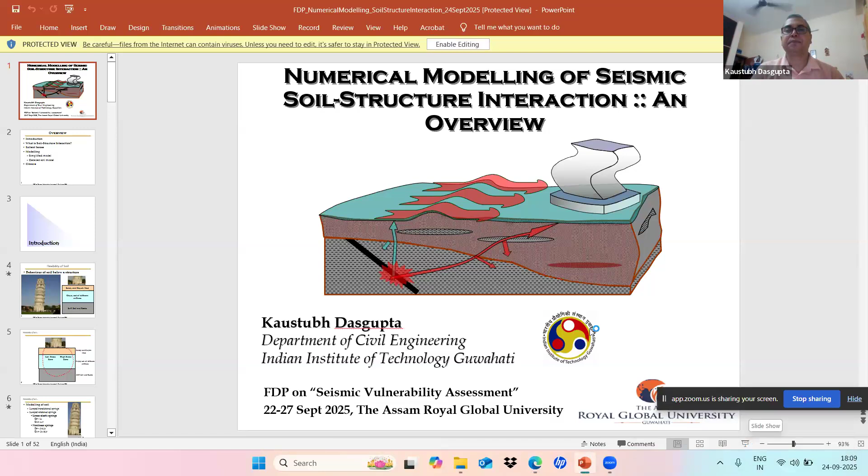The first topic of today's presentation is numerical modeling of seismic soil structure interaction, an overview.

This is a brief overview of my presentation. First, I will introduce the impact of soil on structural behavior and how soil structure interaction differs from our conventional thought of the influence of soil on structural behavior. Then, what exactly is soil structure interaction? We'll have a brief overview, dwell upon the salient issues of concern, and move into the modeling part, primarily focusing on numerical modeling, as is the title of the presentation. We will discuss both the simplified methodology and how the detailed soil model is considered for more realistic analysis, and finally close with a few notes.

For an introduction, let me first give the most popular example of the effect of soil on structural behavior, as illustrated by the Leaning Tower of Pisa.

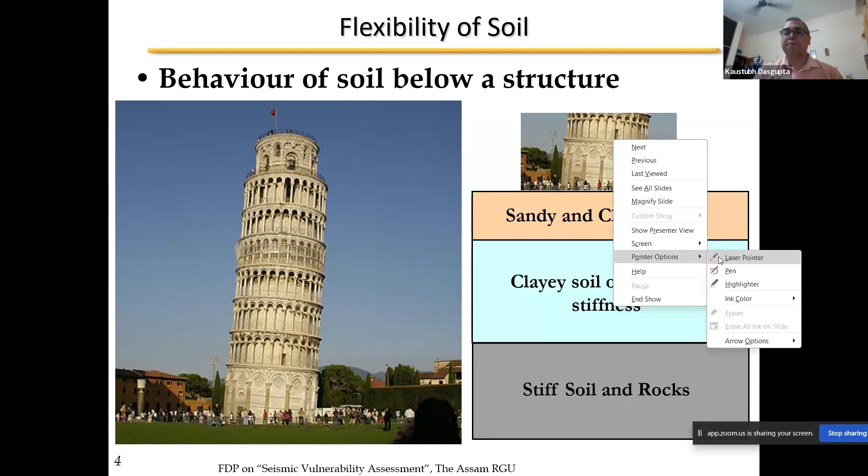What happened was, over a few tens of decades after the tower was constructed, it slowly started leaning. People were concerned and tried different ways of restoring it, like making it stable by means of ropes, or trying to buttress or prop at different locations and heights. But every time, even if it was restored for some time, it started leaning again.

So people left it as it was, and after a certain time the rate of leaning reduced to a very small value, and in some way it got stable. How this stability was achieved, how the underlying soil affected the entire tilting behavior, was a topic of immense research over decades.

If we see the underlying layers below the leaning tower, it was very near the coast when constructed, though the sea line later moved slightly away. Just below the ground surface we have sandy and clayish mud, underlain by clayey soil of different stiffness, and finally stiff soil and rocks.

With this composition of underlying soil, when the initial leaning started, differential stresses were introduced. When a foundation or element tries to bend, one part compresses the soil more, creating more bearing stress or bearing action from the underlying soil, while the other part gets relieved because it's getting uplifted. This composition of underlying soils probably made things easier or facilitated further leaning.

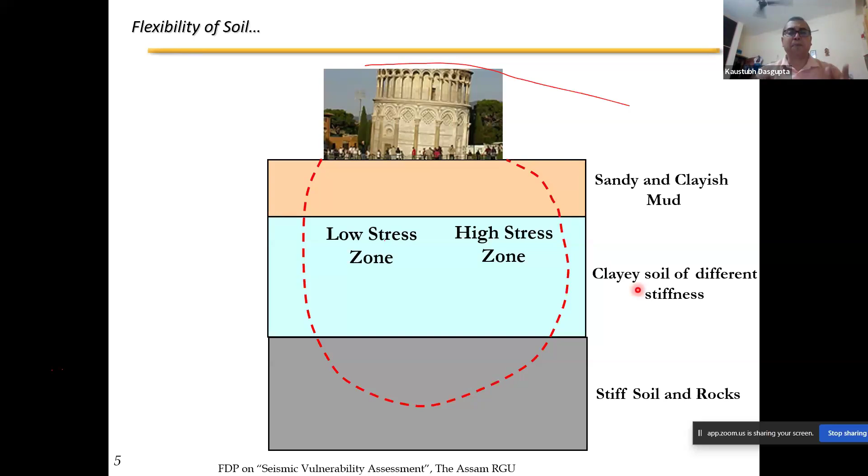When we have high stresses, the microstructure of these soils also undergoes changes. If you go into the depths of soil mechanics and constitutive behavior, you will see that soil can pass through different phases depending on the strain level and stress level. So all of this complicated the entire action.

So people started different ways of trying to understand the behavior of this leaning tower. Whenever we talk about the underlying soil, the simplest way is to consider some kind of spring.

When we say spring, it can be like a conventional translational spring. If you give some displacement between two ends of the spring, it can get elongated or compressed, and depending on the amount of elongation or compression, a corresponding spring resistance develops. That's what we learn in plus-two level physics and undergraduate mechanics.

Apart from translational action, where relative displacement between the two spring ends gives rise to spring resistance, you can also have rotational springs. How does the spring resist rotational action?

The spring is designed so that any relative rotation between the two ends of this rotational spring will generate some resisting moment. Just like in a translational spring, relative displacement gives rise to a force in the form of spring resistance, here it generates moment due to differential rotation. People use these rotational and translational springs in different combinations to simulate the behavior of the underlying soil layer.

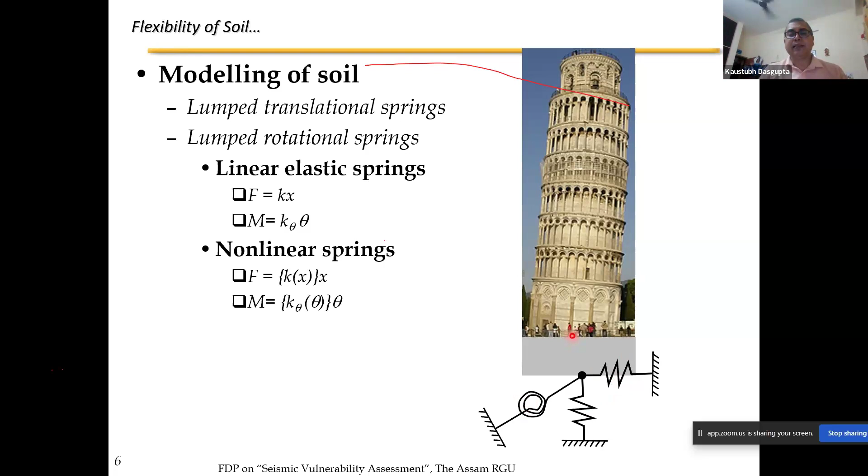Because the foundation is quite large - the diameter of the tower is in tens of meters, not 3-4 or 5 meters - beyond that dimension, this single lumped spring modeling does not give realistic behavior. So people tried distributed springs instead, considering the underlying foundation like a plate action over which the tower is standing, and then tried to simulate it. This is a slightly more advanced way of modeling the soil, using distributed springs instead of a single one.

Then people thought that instead of this spring action, why not model some part of the underlying soil as a domain. In domain modeling, we generally adopt the numerical method known as the finite element method, which has been very popular over the last century. There are different ways of considering the size of the domain, how you decide these elements in the entire domain, and so on. People have done a lot of studies on this.

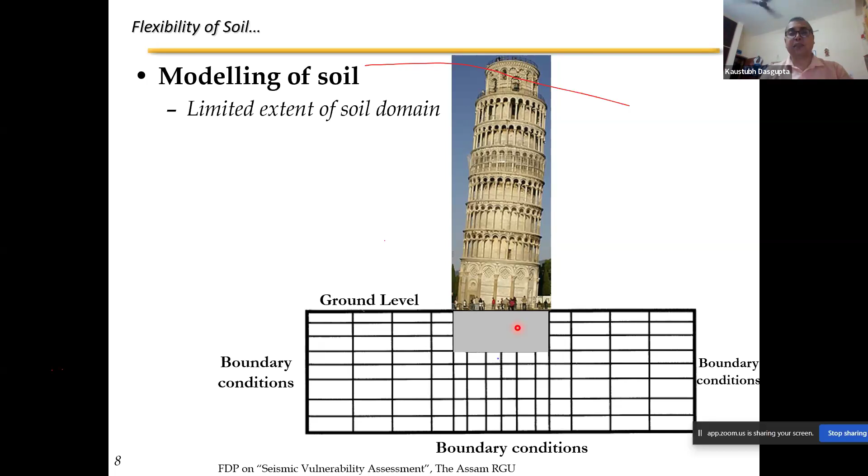Let us look at a small example. That was a practical example. Let us now look at some numbers. When we do structural analysis for any kind of normal building or conventional structure, small structure, we never consider the effect of underlying soil, right? That's not part of the conventional design process, or the analysis part.

So here we apply a lateral load of certain value, and we want to see how the columns and the beam respond through the bending moments, right? Because under any applied load, the members will generate shear force and bending moment.

We all are aware. So we are considering 3 types of soil: one which is very soft, similar to the upper layers of the Leaning Tower of Pisa; then medium stiff; and then very stiff. Very stiff means we are now going close towards rocky behavior, where the deformations and those things are very, very less. So we want to see how the bending moments are generated on this portal frame.

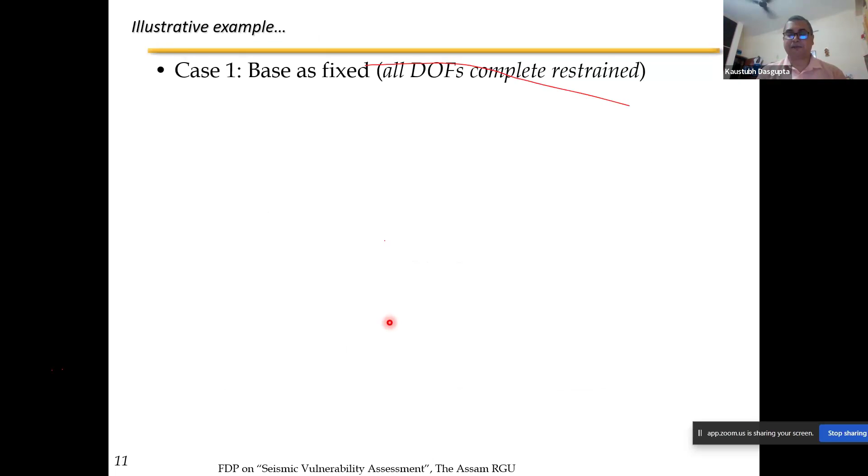So this is how the frame looks like. In the first case, what we are considering is that all the degrees of freedom at the base are restrained. So one is the fixed base. That is the conventional method of analyzing any kind of building frame. When we do not want to consider any effect of soil, we simply consider all the translational and rotational degrees of freedom to be fixed, right? So no rotation, rotations are 0. No translation, translation is 0.

In reality, does your soil really conform to that condition? No, because depending on the stiffness of soil, there can be settlement. Settlement means the translational degree of freedom has to be allowed. Your frame can tilt, just like the Leaning Tower. So there can be some rotation, so your rotational degree of freedom also has to be allowed. So in reality, your degrees of freedom being completely restrained is not going to happen at all.

But then why do people consider that in conventional analysis? Because even if you consider this fixed base, the estimated moments and shear forces we use for design are expected to be on the higher side. So your design is going to be conservative and safe, right? So people are really not bothered about the effect of soil. So that was the first case.

Second case is we assign the translational and rotational springs, just like we saw for the Leaning Tower of Pisa. That is case 2. And case 3, we are going to have the soil model as continuum, so the domain method, we call it a continuum method, like the soil is a continuous medium. We are discretizing in a certain way and then considering that extent of the soil. So we have 100 meters on the horizontal side, that is the size of the domain, and to a depth of 30 meters. And case 4, when you have the soil modeled as continuum with the same properties, but with flexible boundaries. So these are the 4 cases.

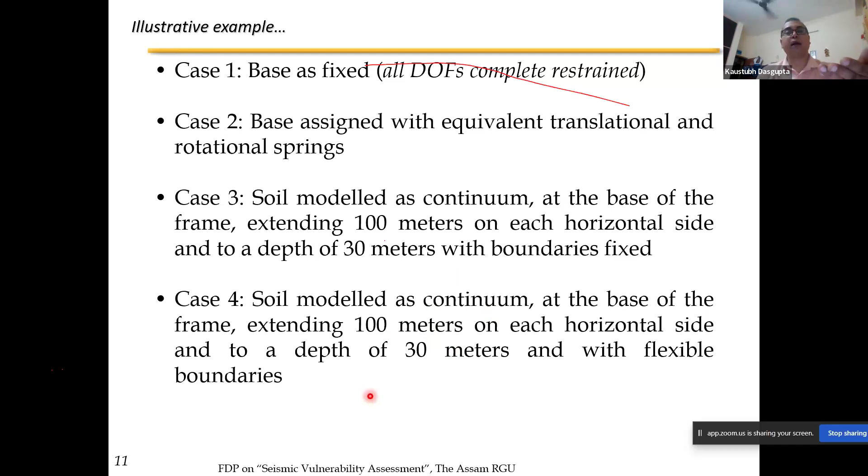Let us see the results. Just on the portal frame, we want to see the effect of soil through the different kinds of modeling. So this is how case 1 will look like: you have fixed bases, right? No degrees of freedom has been released. These are your translational and rotational springs, as we had seen, the vertical, horizontal ones and the rotational ones.

That is case 2. Case 3 is this domain. As you can see, you have your soil domain 100 meters on either side, extending, and 30 meters deep, and then the end nodes have been kept as fixed, right? So that is case 3. On that your portal frame is sitting.

Similarly, when you have case 4, you have these boundary ends. These are with springs, right? So these are not fixed. That was case 4.

So if you see the result, what happens when you have a completely fixed base, that is no effect of soil - you can see how much is the magnitude of bending moment. It is around 714 kilonewton meter at the column base, and at the column top or the beam end, it's around 530. So this is the conventional method, no effect of soil, and this is supposed to be giving you overestimation of forces and moments.

So this is case one. Let us look at case two. In case two, you have very soft soil. One is with continuum soil model with boundaries - this one, when you have the soil domain, that is 2A. And then second one is your 2B, that is when you have equivalent soil springs, right?

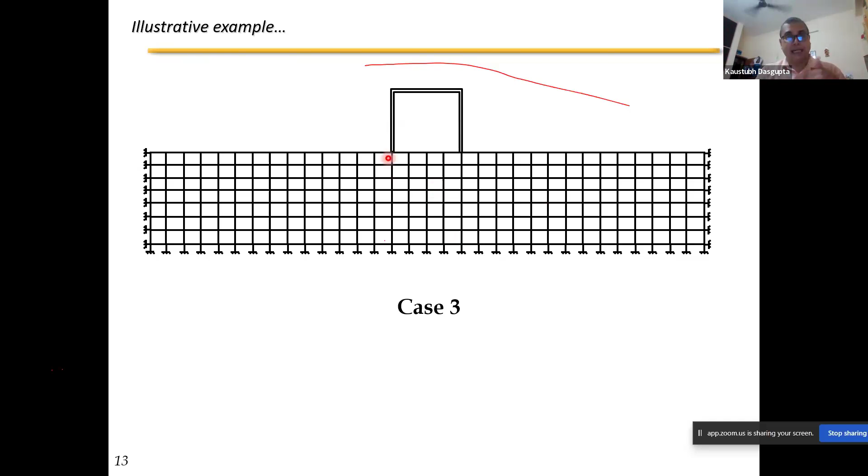So when you are using this domain model, that is 2A, your bending moment has reduced from 714 in the previous case, where you did not have any soil, to 284. There is a significant reduction in the bending moment. What happens at the top? The column moment has reduced, but at the junction, earlier the moment was 530, now it has become 960, almost a twofold increase. So what has happened? The bending moment at the bottom of the column has got released, and more moment has been accumulated at the junction. This was with the soil domain, the one most close to realistic.

And when you have the springs, what happened? The bending moments at the bottom of the column definitely were reduced as compared to the fixed one. From 714 with the spring, it has reduced to 596, around 600. But it has not reduced to the extent when you model using the soil domain. So with the spring, definitely your soil behavior is affecting, but your domain model is coming out to be the best one because that is really giving the relieving effect of the soil at the column bottom. And at the junction, since the reduction at the column bottom is not that much, the beam column junction moment has increased, but not as much as the increase in the domain model case. So this shows how different ways of soil modeling really affect the results.

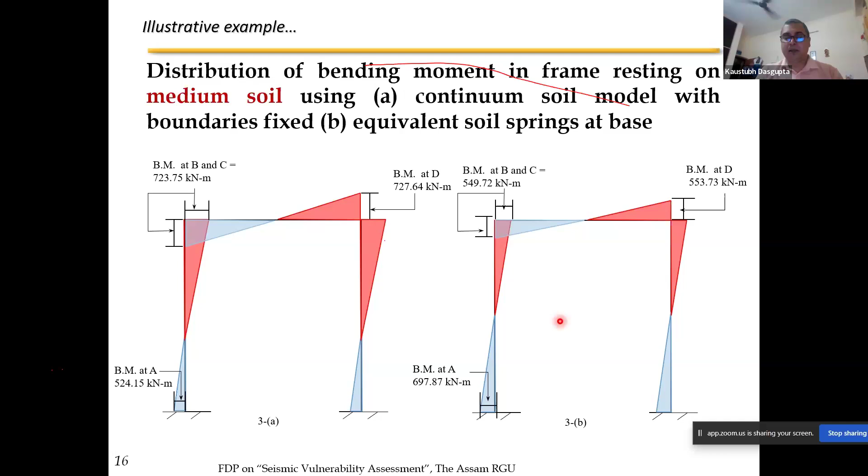And then when you have very stiff soil, it is going closer to the condition of rock. In rock, what will happen? If you have the column embedded in rock, how do you carry out the construction of the foundation? You can provide shallow footing because you have very good bearing capacity. Rocks can offer immense bearing capacity, so you need not go for deep foundation. So in rock, if you have to do some foundation, you go for open foundation, shallow footing, and that too you have to drill the rock, right?

If the rock is very hard, then depending on that rock quality designation, RQD, you have to do the blasting and then find out the area, then do that. Once you have an open foundation in the rock, it does not have the ability to rotate, does not have the ability to translate in any direction. So it is more like all degrees of freedom restrained, close to the fixed base.

So for fixed base, if you recall, your value at the bottom of the column was 714 kilonewton meter as bending moment. And here for the very stiff soil, it is very close. It is less, but very close. So as you can see here, your domain model will still give you less moment as compared to the spring, right? So this is how the modeling of soil is going to affect the structural behavior.

So whatever we discussed till now was the influence of soil on structural behavior, as exemplified by the leaning tower or the frame behavior. So no SSI till now. So then what is SSI? What is all the hue and cry about soil structure interaction?

So if we want to see what soil structure interaction is, we have to briefly first start with how the earthquake mechanism happens. Typically we have some release of energy in the crust of the earth, or in the mantle, depending on the depth. There is a fault rupture somewhere, energy gets released, and the energy gets propagated by means of waves. When you have waves, they have to follow all the mechanics and physics as we studied for waves in our plus 2 level, class 11, class 12. So you have reflection, refraction, total internal reflection, and whatnot. Everything happens. These are called seismic waves. If you read more into that, you have body waves and surface waves, and so on.

So initially, the body waves propagate through the rock, then they reach the soil domain. This brown part is your soil domain, and then they reach the surface. During this entire propagation through the soil domain, the waves keep on changing their characteristics. The amplitude, the frequency, all get changed depending on the layers of soil and their constitutive properties. So waves undergo changes, and the final wave reaching the surface—here also some part gets traveled along the surface, which are called surface waves. Some part gets turned back inside the domain, and they will again propagate and spread out. So a lot of wave phenomena carry on, keep on happening.

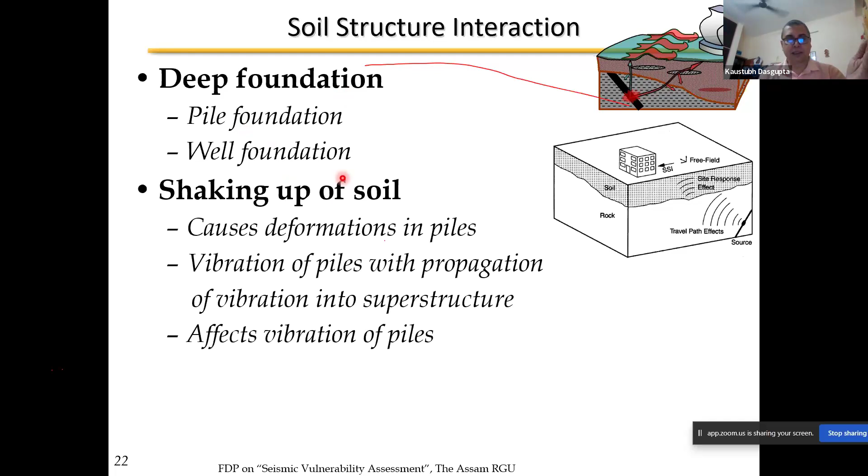As I was mentioning, shaking up of soil causes deformation in piles. Vibration of piles will vibrate the superstructure. Superstructure vibration will affect the pile vibration. Piles are long elements embedded in the soil, and the vibration of the surrounding soil will be further influenced. So this is the repeated interaction which we call soil structure interaction.

Hope it is clear. So when you just model the soil as it is and apply a static load, it is never an SSI. So if you hear somebody calling that SSI, it is not at all correct, please note that.

So this is how your piles will be embedded in the soil domain. And then when you look at the boundary, what happens is, when the waves come and affect the surrounding soil, the soil will vibrate the piles and the entire shaking will propagate upward.

Now what happens, some of the waves also turn back. In all directions, the waves will be turning back. Some of them will get reflected from the pile surface and turn back. When they turn back, your waves will again go and dissipate away into the largest soil extent, so they will not affect the structure.

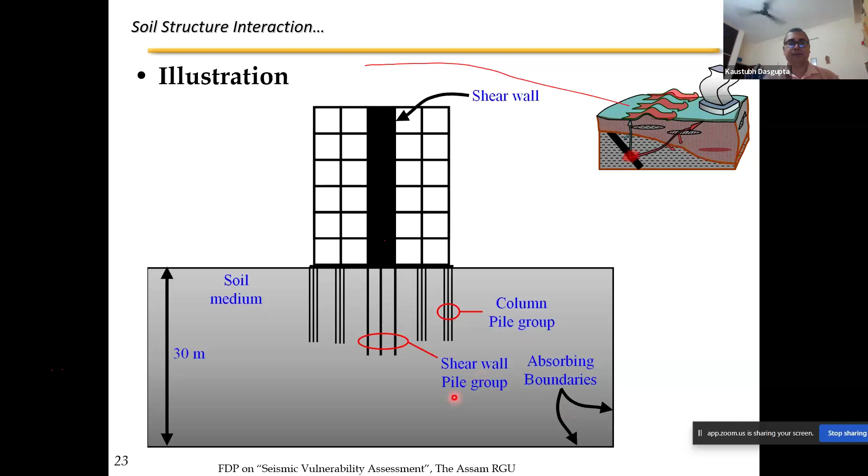So if you model these as fixed boundaries, as we had done for one case for the Leaning Tower of Pisa, it will not give you realistic soil structure interaction, because the waves will get trapped and keep on reflecting. Similarly, when you do SSI, the conventional modeling or restrained footing will not give you your SSI, because when you restrain the degrees of freedom, all your effects of soil are gone. So this is not the way. Then what should we do?

When we do simplified modeling, we consider it as a multi-degree of freedom system, which we convert into an equivalent single degree of freedom system, like an inverted pendulum. This is the conventional way in structural dynamics. When you do dynamic analysis, you sometimes convert it for a simplified method into an equivalent single degree of freedom system. We call it multi-degree of freedom because at different floor levels, masses are lumped, and at each level you can consider some displacement. So multiple degrees of freedom, multiple translations, are required to describe the dynamic behavior, instead of a single degree of freedom with only one translation describing the behavior—that is simplified.

Why is this equivalence really required? Because for a single degree of freedom system, just like the behavior of a simple pendulum from your 11th and 12th physics background, you can easily find the natural period of vibration or natural frequency, and that can be related to earthquake behavior. Whenever you talk about seismic behavior, your natural frequency and natural period are very important. Whenever we do any seismic or dynamic analysis, the first thing we check in the numerical model is how much the natural period and natural frequency are coming, which tells you whether your modeling is correct, based on physical experience of the expected range.

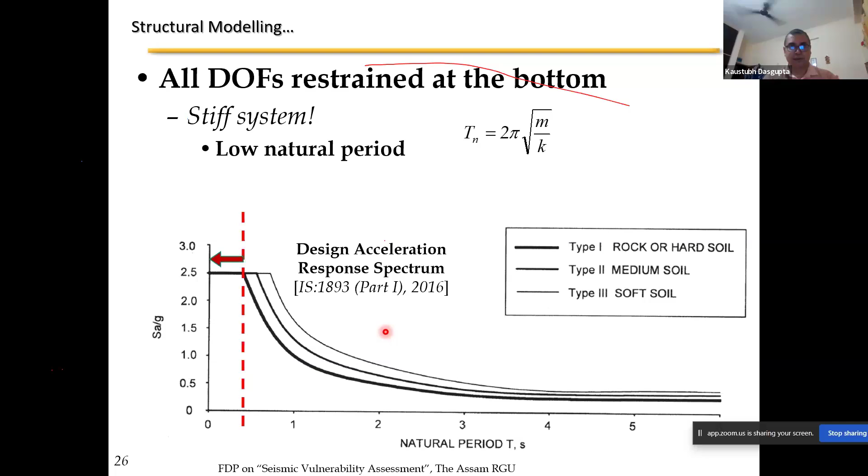This figure is proposed in IS 1893, and it is going to be used for design, not for anything else.

If you really look at the response spectrum, it is never such a smooth, nice looking curve. There are a lot of irregularities, ups and downs. So to simplify things, to make it easier for practical designers, this document has published such a nice figure.

This is used to estimate the equivalent lateral forces, which gives you the design seismic forces: design shear force, design bending moment, in combination with other loads.

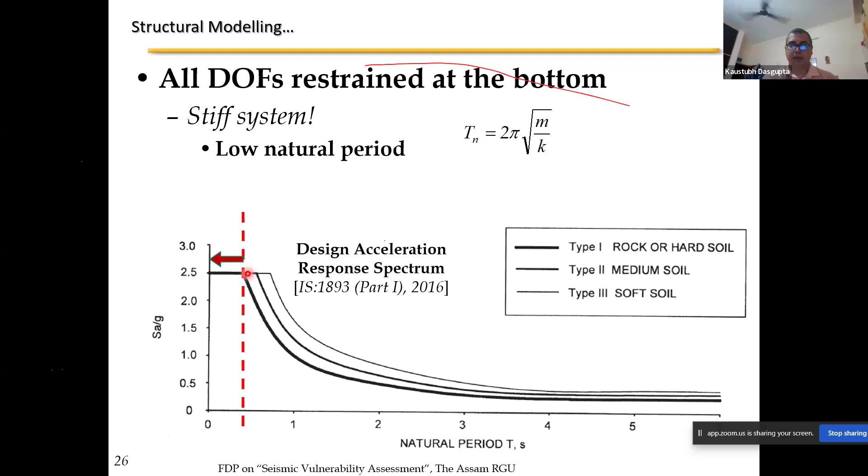When you have a stiff system, like the conventional one with all degrees of freedom restrained, there is no soil. So for a stiff system, with large K, K being the stiffness, your natural period comes down because the denominator is large. So you have low natural period, and then the acceleration is more, giving you a conservative estimate.

When you have presence of soil, the K is now less because you are considering either a spring or the soil domain. So K is less, natural period is more, the system is flexible compared to the fixed base. So there is an increase in natural period.

So on the x-axis you are moving, and that gives you less acceleration, because you are now looking at the part of the curve coming down. In this region, the acceleration is less, so your design forces are less. You get less bending moment in the column, less bending moment in the members close to the soil, as we had seen for our frame. So the response is less.

So when you consider the conventional structure with the base fixed, you are considering higher design forces due to the large acceleration, which gives you a safe design. May not be economical, but safe. On the other hand, if you consider soil, your response is less, so shear force and bending moment are less. Everything comes down.

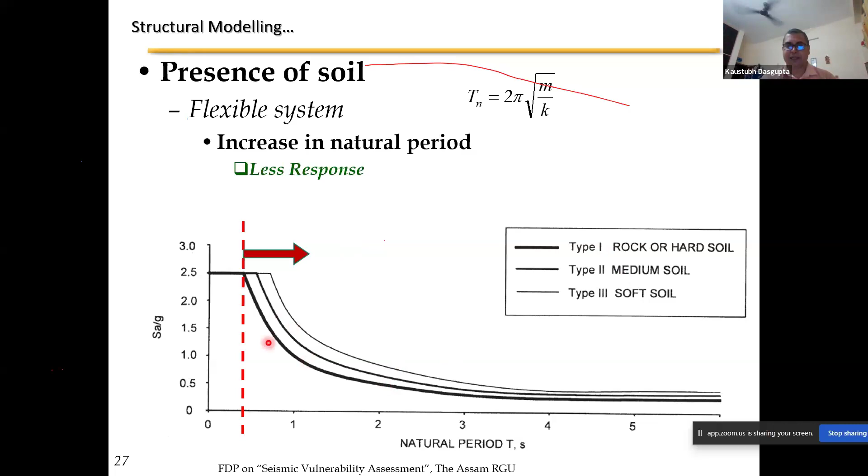Then the Indian code also prescribes three curves for different types of soil. You will have different effects for the same natural period. So if you ignore the effect of soil in the dynamic behavior, you are going to have a safe design. That is what we expect from that response spectrum, and if you consider soil, you expect less response.

Does it happen always? That is the question. Whenever an earthquake comes, is the response spectrum going to behave like that? Does ignoring soil, fixing all degrees of freedom, always give you a safe design? That is the question.

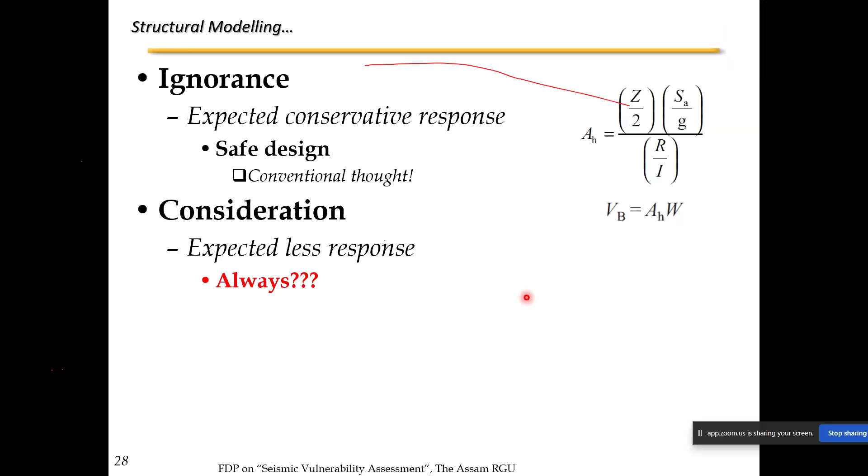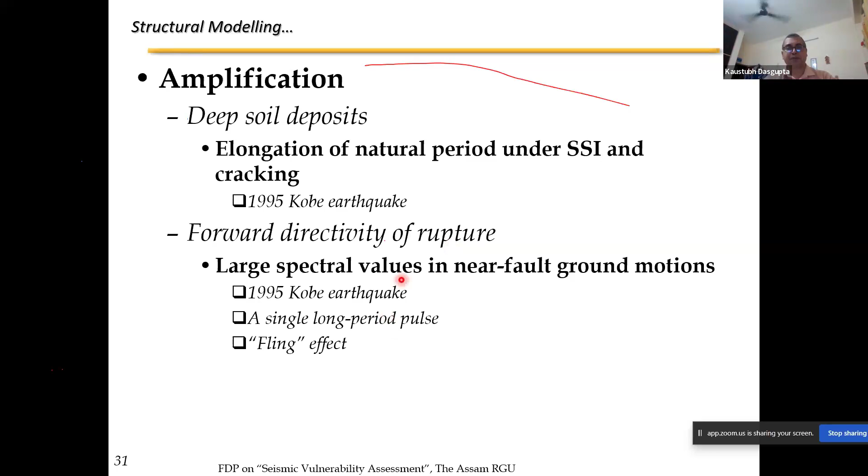There is also a particular terminology in earthquake engineering called the directivity of rupture. When a fault gets ruptured during the release of energy, it ruptures in a particular direction. So if a fault is oriented from southeast to northwest, is it rupturing from northwest to southeast or from southeast to northwest? Along the fault you may have different buildings, so depending on the direction, your amplification can change. There are different effects, like the long period pulse and fling effect for near fault motion. All these can lead to collapses and can amplify soil structure interaction.

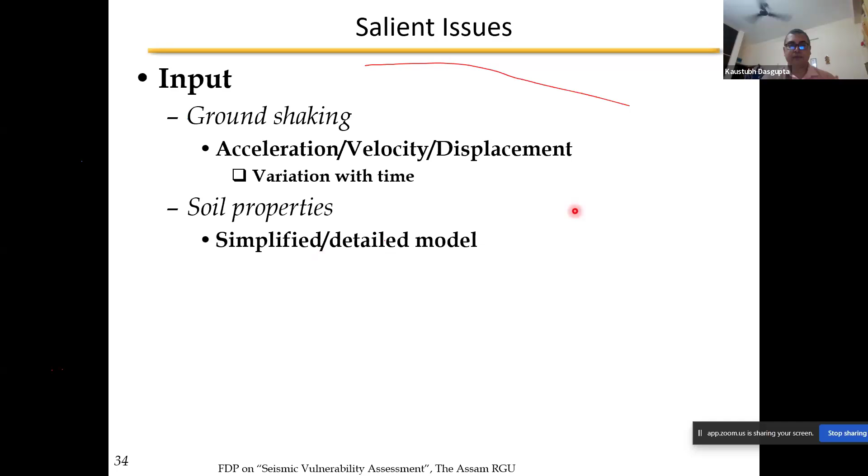Then soil properties - these are very important, whether you are going for a simplified model or detailed model, how you are using constitutive properties. Constitutive properties of soil are very, very important. Why? Because depending on the type of soil, you have different behavior - you can have dilation, you can have phase change. If you talk to a geotechnical person, they can explain phase change to you. So all these affect the behavior.

And especially during earthquake shaking, what is happening? You have, over a small amount of time, large strain in the soil, because when the ground is shaking, there is large shear strain. When the waves propagate from rock to the upper layer, the soil layers try to shear against each other - horizontal movement. So shear strain momentarily increases to a very large value. When the shear strain increases, the damping ratio and the shear modulus all get affected. You have standard curves for the change of shear modulus or damping ratio.

So those are very important: how you model the soil and what are the constitutive properties. Whether you are considering drained condition or undrained condition, because over a momentary time, since the strain increases, the stress goes up, the pore water pressure can go up to a very high extent.

And depending on the type of soil, if it is sandy or sandy silt, or for certain soil, the soil can liquefy. So you can have liquefaction during the soil structure interaction. So all these are very important.

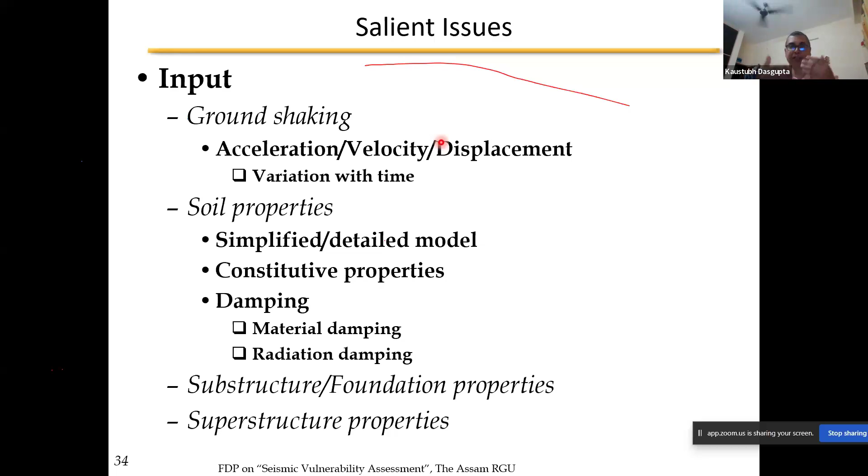Then we talk about near field effect. When you have ground shaking very close to the fault, then you can have the interaction close to the soil foundation interface. You can have far field effect when the fault rupture is at a very far away location, and when the waves come and reach the site, you can have a different kind of far field effect. So different connotations, different effects are there, just to familiarize you with the different terminologies and effects.

Let us now come to the modeling, the numerical modeling part. I won't go into very deep detail, but we will give you a good overview.

So the first one is your lump spring, which we have already discussed. In the lump spring, you have 3 degrees of freedom for translation, and you have the translational springs I had mentioned in the Leaning Tower of Pisa example, for all 3 directions. You also have 3 possible rotations: about the x-axis, about the y-axis, about the z-axis. So about those axes, since you can have rotation, you can also model the rotational springs, which will give you the moments.

So you can have rotation about the vertical axis, that is like a torsion, about the column axis, where the entire foundation or pile cap rotates in the horizontal plane. That is your torsional stiffness, torsional moment. Then you can have rocking - your entire foundation can rock back and forth. So about the x-axis you can have rocking, about the z-axis you can have rocking.

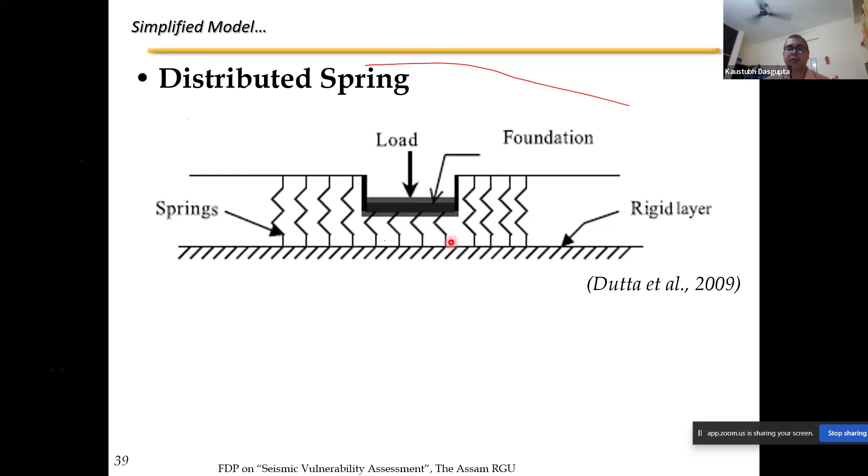Now what about the rotational behavior? When this foundation tries to rotate, it will get tilted. So some springs will be under tension for the uplifting part, some springs will be under compression for the bearing part. So there will be the effect of rotation coming onto this translation spring. A single spring will not be able to capture this rotational effect, but when you have multiple springs, you can capture it to some extent. So this is the distributed spring model - one step better approximation of the underlying soil behavior, though not fully.

When you have distributed spring, it's typically used below raft foundation or mat foundation, whether you have raft with piles or without piles - below the raft we consider distributed springs. Nowadays we have different commercial program softwares trying to model the slab as a plate element, and then you can have these springs.

How do you get the spring constant? By considering the modulus of subgrade reaction. Depending on the type of soil, certain values of K are specified, and that's how you do it. So for design level, quick approximation, maybe on the conservative side, this spring model as a distributed one is quite good - that's why people use it in design. That means it must not result in unsafe or unconservative values. So this is the second way.

The third option is, if you do not have only translational linear elastic springs, you can have elastoplastic springs. So you can have one elastic spring and another plastic element, combined together.

How does it work? Whenever there is settlement, deformation, or tilting, the raft will tilt. Up to a certain level of displacement, the linear elastic behavior is captured by the elastic part. Once it crosses that yield limit, the plastic element takes care of the inelastic behavior. So for large displacement, up to the linear elastic part this is active, and beyond that the plastic element becomes active. This is one level of approximation to take care of the nonlinear behavior of soil.

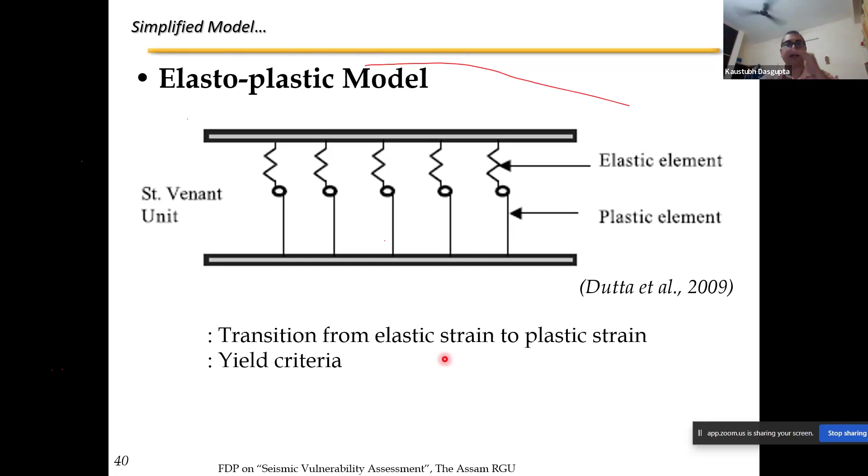As I was mentioning, beyond a certain strain, most soils show nonlinear behavior. They don't show linear elastic behavior, where if you reverse the strain along the same path, the stress values would also be reflected. It doesn't happen like that. So certain yield criteria need to be specified for the transition, where yielding will happen, and so on.

Then the most common one, which is used not for design—when you do soil structure interaction, rarely is it used for design. Most of the time it is used for evaluation. So you design the structure, you design the foundation, then you want to see under an actual earthquake how your foundation will behave, how your surrounding soil will behave. That's when SSI comes in very handy. Most of the cases, that's when SSI is used.

So the most common one is the nonlinear Winkler springs. You consider nonlinear Winkler springs specifically on deep foundations, like piles. Piles are considered like beam column elements, and then you have certain nonlinear springs and dampers.

But then when you have ground motion, because waves are coming and vibrating the surrounding soil around the pile, how is your soil going to damp the vibration? Whenever you talk about dynamics of any system, damping is a very important term, a very important property. So damping has to be estimated very carefully and as accurately as possible. In order to specify the damping, we use certain elements known as dampers. There have been studies on how the damping has been modeled, and how it is going to be modeled.

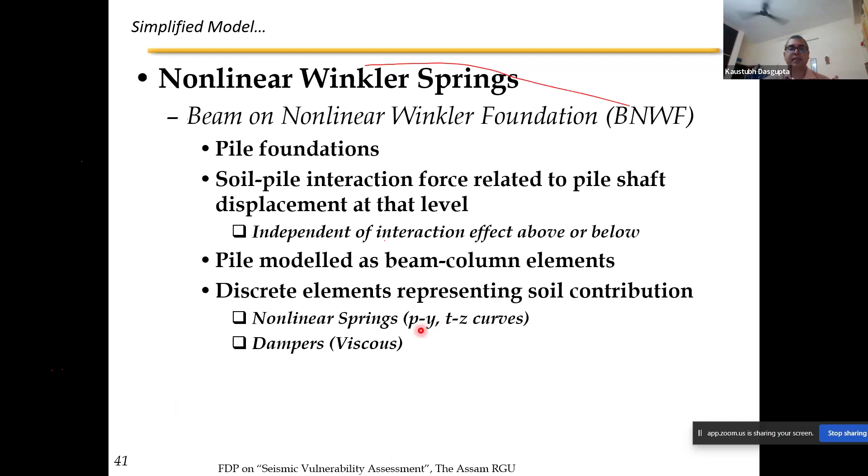So this is how you have the BNWF model. It takes care of near field effect and far field effect. If you do not have the structure, you have the free field soil effect. Based on the free field soil, you can find out how the ground motions are generated at different levels as waves propagate, which you need to give as input. When you consider the vibration, you will have large vibration in the vicinity of the pile, leading to more damping, which is taken care of by the near field element. When the waves dissipate out, you have radiation damping, taken care of by the far field element. So the BNWF model is very, very realistic—it tries to capture all this.

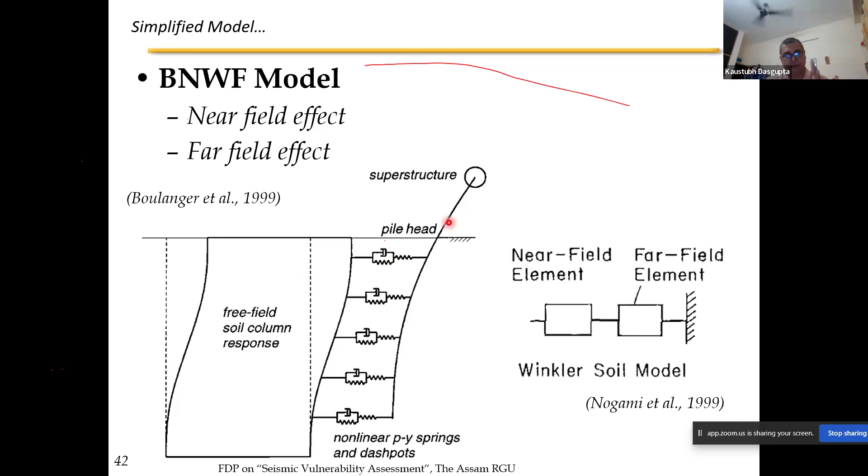So now when you come to the detailed model, these all use certain kinds of springs.

Among the spring models, BNWF is the most efficient one. Then when you come to the continuum approach, when we model the soil domain, what do we consider? It is semi-infinite, linear, elastic, homogeneous - that is the simplest assumption. In reality, the soil is not going to be elastic, and you don't have homogeneity - you can have different soil layers. So this is the most simplified assumption in the continuum approach, and then you build upon that the different variations. So what you have to consider is the vertical extent of your soil domain, because below that is the rock layer.

So you have to model wherever you are modeling the soil. Suppose you are modeling the soil below the building, you have to consider the depth appropriately. You need to figure out how deep your soil layer is going to be in the numerical model, in your finite element model. Do you want to model it right up to the rock layer, or not, because this soil layer is very, very deep? The more you model the soil, the more difficult it becomes in your computation, because your program has to run in the finite element analysis and churn out so much data. So it becomes very, very difficult.

How much will be the extent in the horizontal direction? That also needs to be established - the horizontal extent. And that you can obtain from the free vibration of the soil. There are different methods. This continuum method is the most realistic. Among the three different spring methods, BNWF is the closest to reality, but here you are looking at the most realistic one. So when you do the free vibration analysis, this is how you try to obtain the natural period of the soil depending on the shear wave velocity.

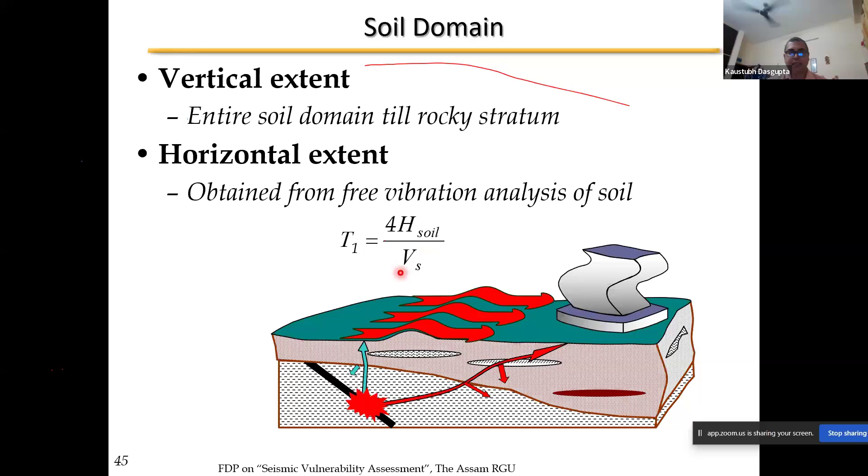When you try to model the soil domain, what will be the size of this element? That also needs to be specified. If you go for a very small element, you can do that, but then the number of elements in your soil domain will be very high, so your computer will take more time. You need a very high speed computer to run your model, which will be quite difficult. You need to figure this out, because we all are engineers - we cannot be like theoreticians, running computer programs for days and weeks and finally landing up with no useful result. That is not our purpose. We should all look at it from the engineering point of view - in a certain limited amount of time, how efficiently we can run the system.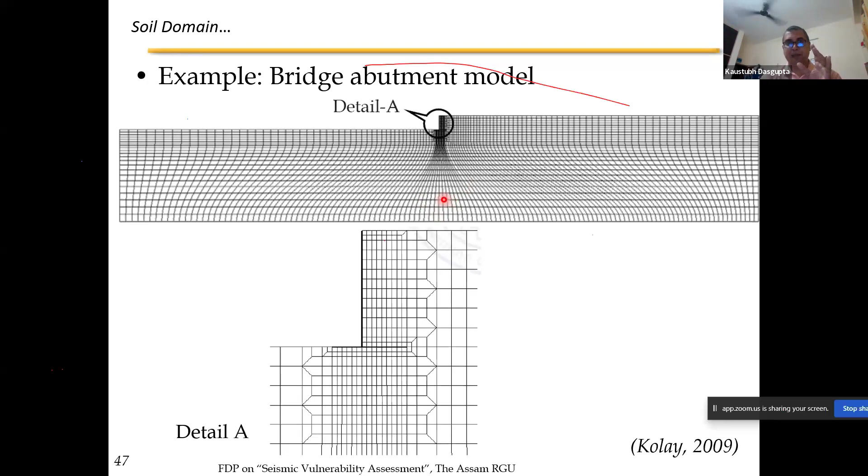If you are going to do soil structure interaction, particularly for research, you should try to see whether this continuum model can be established. If you do this continuum modeling, it gives you the most realistic result. Whatever is the actual condition, exactly 100%, it can never be simulated. You should not think your model is the best — there will always be some limitation, however sophisticated it is. But how far you can do the sophistication within a limited time frame, how close your result can be to realistic, that is the challenge.

Let me summarize. I tried to give you an overview of the numerical modeling part. If you look at soil flexibility, you have relief in the bending moment at the bottom of the column. However, at the beam-column junction, your bending moment increases. But you need to remember that is not the soil structure interaction itself — that is only the effect of soil on structural behavior. So that is one part.

However, when you have soil flexibility, another part is the increase of displacement. Sometimes if you model the soil with a spring or soil domain, the overall structure becomes flexible. Once it becomes flexible during earthquake shaking, your superstructure will vibrate, whether it's a bridge, building, or tower. So you have lateral displacement concerns — you cannot sway the structure too much. If you have a 30-story building and consider sway at the top, people won't be able to stay there. So serviceability criteria becomes an issue, and you need a trade-off for how flexible your building can be.

Your time of computation and associated cost have to always be considered when you do soil structure interaction study. For conventional buildings — small buildings, a 3-story or 1-story house — it may not be affordable, because if you have to do soil structure interaction for that, you need to be paid by the client. The homeowner, an individual house owner, may not be able to afford that much money. So for low cost, low budget projects, this may not be feasible.

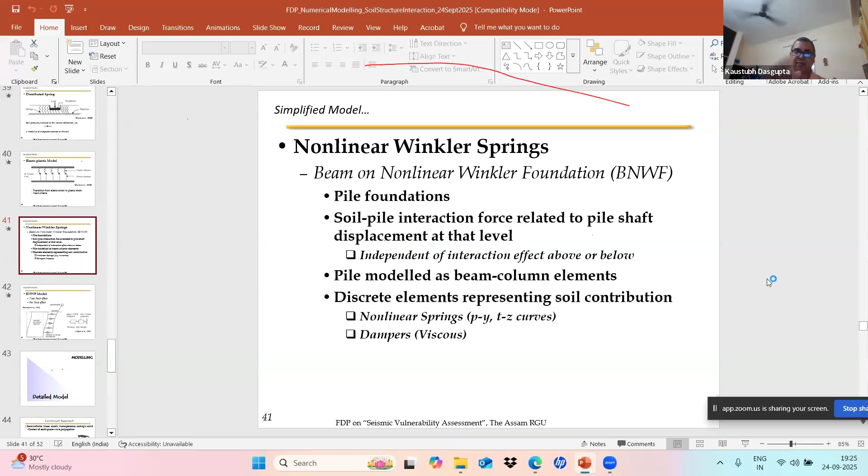What I'll suggest is, if you want to go for a spring model, when you are learning soil-structure interaction, you can go for the BNWF model first. In the BNWF model, if your building is on piles, this is the most suitable one. The building can be low-rise or high-rise, because here you have only the piles and the soil modeled as springs at certain depths. In terms of complexity, this is the simplest. So using BNWF, you can use your full high-rise building, maybe 25, 40, or 30 stories, whatever it be.

However, if you are going for the continuum model, here I should suggest you make a small model, maybe of the building, 5, 6, or 4 stories, and first learn it. You need to give the motion at the bottom of the domain, so that the soil elements get shaken up, the waves propagate through the vibration of these elements, and wherever the piles are, they get shaken up like that. So whenever going for the continuum model, my suggestion is go for a 4-5 story small-rise building first and learn it. Once confident, increase it, then just replicate the stories keeping the model same. If you wish to keep the model same, no issue, but first do the learning part with a low-rise building.

Okay, yeah. Sir, one more thing - you mentioned the name of a book. Can you drop it in the chat box? Yes, I'll write it in the chat box. Okay, thank you sir.

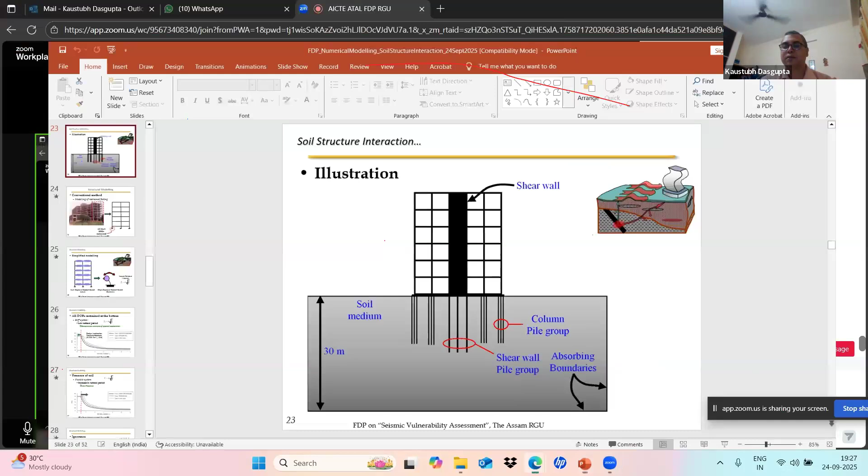It is Geotechnical Earthquake Engineering by Steven Kramer. The first edition came out quite early, I think published by Prentice Hall. One edition came out either last year or the year before, that's the latest edition. This is a very good book, Geotechnical Earthquake Engineering.

Yes sir. I think I have another question from Pravin Thorat: when we are going to design a structure where the strata is partially sandy and partially black cotton soil, what parameters would be taken into consideration while designing?

Very good question, because whenever you have a mixture of sandy and black cotton soil, and even only black cotton soil, it becomes very difficult. My suggestion is first you need to carry out geotechnical tests for the soil layers extensively, like the extent of sandy soil and black cotton soil, up to which depth it is there. You need a number of boreholes and whatever requirements are there.

Once you assess that, what kind of foundation you have to go for, that has to be consulted with a good geotechnical engineering person. The structural engineer as well as the geotechnical engineer should sit together and decide. If you have a high rise building and a lot of load is coming, piles may come out to be very uneconomical, and you need a pile raft over a large extent, because you have black cotton soil settlement and so many things, there can be a lot of changes in the soil. We structural engineers are not at all expert in that. You need a very competent geotechnical person, somebody with extensive experience, so you need to consult them.

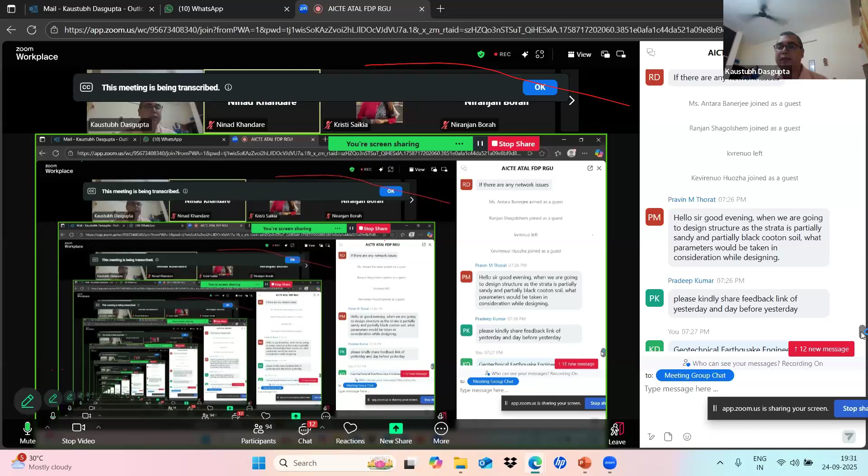Then I think we have a question: can you tell about the future scope for carrying out research in this domain? There is unlimited scope, what I can see. There are so many structures nowadays coming up in soil, in rock, in partial soil. There's so much research to be done.

You talk about tunnels - tunnels are being built everywhere, whether below seabed, below river, through rocks in hills, or through normal soil. So tunnels will have different soil structure interaction behavior for different cases, so there is immense scope. You talk about any buried structure, because nowadays in defense, many army establishments are going for these buried structures of different kinds. So a lot of scope of research is there.

If you are talking about conventional ones, say buildings and bridges, many things we are yet to learn - pile soil interaction for different kinds of soil. There are so many things. In marine areas, when you have piles on which jetties are built, you have the wave action and soil action together, coupled action. There are so many challenges, you can just think and decide.

But when you are going to do research, you should have some area in your mind - you need to study the literature to see what work has been done in one particular area. You have to choose some area of your passion, some interest, and study whatever work has been done, and build upon that. Based on that, you decide your scope of research. There is unlimited scope, a lot of things to be done. A lot of things have been done also, but yet to be done - so many things I can think of.

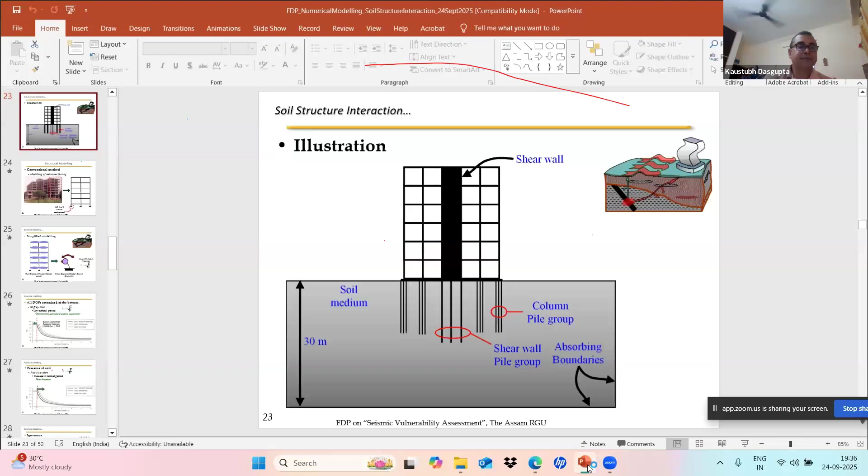How are the ground motions obtained? They are obtained through this free field response. We first do not consider any structure or foundation, just model a soil column, and then we shake up the soil column by means of the rock level or underlying ground motion. Once the soil column gets shaken up at different levels, the property of soil will modify the underlying ground motion.

Whatever has been the input, at different levels, depending on the soil property, through that convolution mechanism, you get the ground motions at different levels. Those ground motions will have different frequency content, maybe different amplitude content, depending on the soil strata.

So basically your question was at which location the ground motions are applied. They are applied at those spring-dashpot locations. Where you want to apply these springs, at which depths, that depends on you. Basically, the way we discretize the pile into a number of elements, at each node we connect the spring-damper system. So at those levels, once you decide where the pile nodes are to be located, and you know the depth, you extract the ground motion output at that depth from the free field response of your soil column.

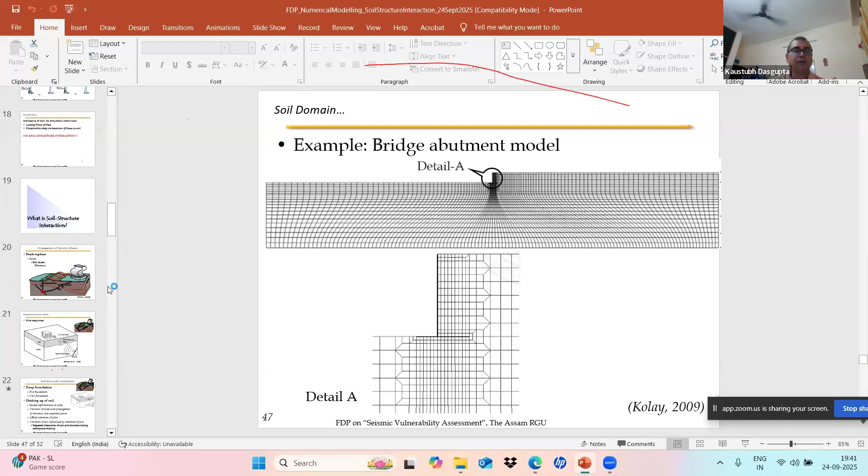Bonisha has asked, what are the available codes for analyzing structure with SSI? Well, if you look at the Indian standard IS 1893, your design response spectrum has curves for three types of soil, as I mentioned. So you can have in the design procedure the codal provision incorporated, having the effect of soil or SSI through these curves. That is the most simplified way.

Otherwise, for conventional buildings, we do not have codes or codal provisions for specifying SSI, because when you go for SSI you need ground motions, and what ground motions you have to apply - that is the challenge. Because when we design any structure, we never apply ground motion, since it's debatable which ground motion you should design for - whether that ground motion will occur at all, or whether that can be the maximum effect, you never know. So for real SSI you need ground motion, and with ground motion it's difficult to design. So directly, the codes do not specify SSI.

But if you look at design guidelines for critical structures, such as nuclear power plants or dams, they specify that SSI is mandatory, and there you have to carry out seismic hazard analysis to a certain detail to get the ground motions. There, the design is done by equivalent static method, then you have to do the seismic evaluation multiple times depending on the possible ground motion. If the ground motions give quite large shear force and bending moment compared to the design values, you may have to magnify or scale up the design moments and shear force. So there are different aspects involved. For critical structures or lifeline structures, certain design guidelines exist about SSI.

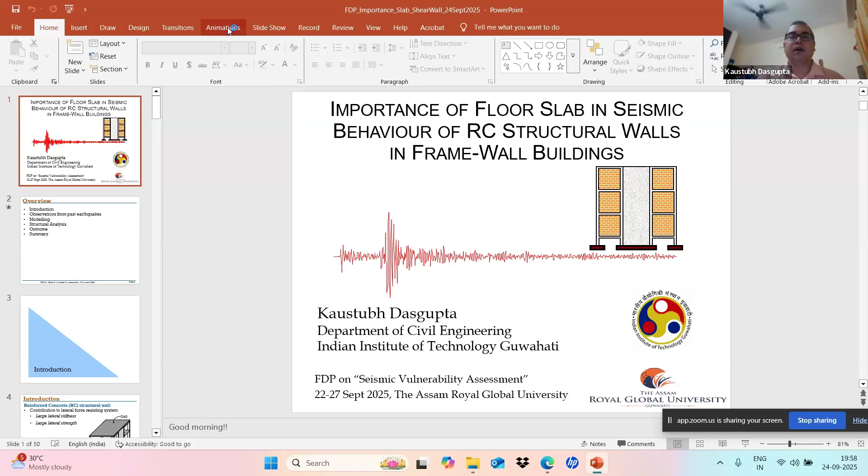So welcome once again. This is the second topic: the importance of floor slab in seismic behavior of RC structural wall in frame wall buildings.

This is the overview of my presentation. I'll spend some time introducing the topic, then we will look at observations from past earthquakes, then how the modeling is done, and then how the structural analysis is carried out in this case. Then what are the salient outcomes? Not all results will be shown, and then we'll summarize.

So with the introduction, let me start with the behavior and the role of shear walls. As we know, in the typical multi-story building we see around in urban areas, we have the frame structure consisting of columns coming up right from the foundation, and then beams completing the framing action. Then you have the floor slabs at different levels, and the roof slab. Once the frame is in position, we have the infill walls, maybe from burnt clay bricks or nowadays autoclave aerated concrete blocks, the AAC block walls. So these can be different ways.

Now what happens when we have this building coming up in an earthquake prone region? The waves will come up, shake up the foundation, and the vibration will propagate first through columns, then the beams, floor slabs - they will all be shaken up and interacting, as we discussed previously.

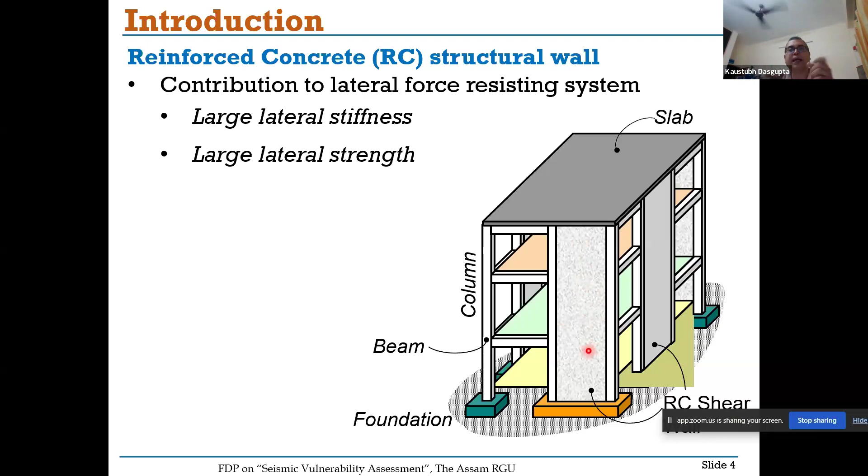So in the out-of-plane direction, in the other direction, this wall will not be effective in absorbing shear force. The stiffness is very small, I is small. So in the other direction, you need separate walls having the in-plane configuration in that direction. If shaking is in this direction, this wall will be effective; if force is in this direction, this other wall will be effective. So you have to position the walls accordingly. This is the transfer mechanism.

Now let us come to the classification of walls. The first one is the slender wall, where the height of the wall divided by the length of wall is more than 2. How will it behave? It is like a cantilever beam turned upward.

In a cantilever beam, you have the horizontal beam, one restrained end and the other free end. If you turn it anti-clockwise 90 degrees, this is your fixed end and this is the free end. Since this is a long member, it will act like a vertical bending beam, simply bending like a cantilever. Since the length is more, it will bend, so flexural strength will govern. The action will be like a beam bending, just a cantilever beam bending in the vertical plane. That is called a slender wall.

This is one figure of a slender wall, taken at University of California, San Diego, where they have a large outdoor shake table. A shake table is a table on which you can mount any model of a structure or component and shake it, giving it ground motion like what you experience during an earthquake. That element is subjected to earthquake motion, and then they study the damages and behavior. This is one slender wall constructed, and as you can see, the height is very tall as compared to the length.

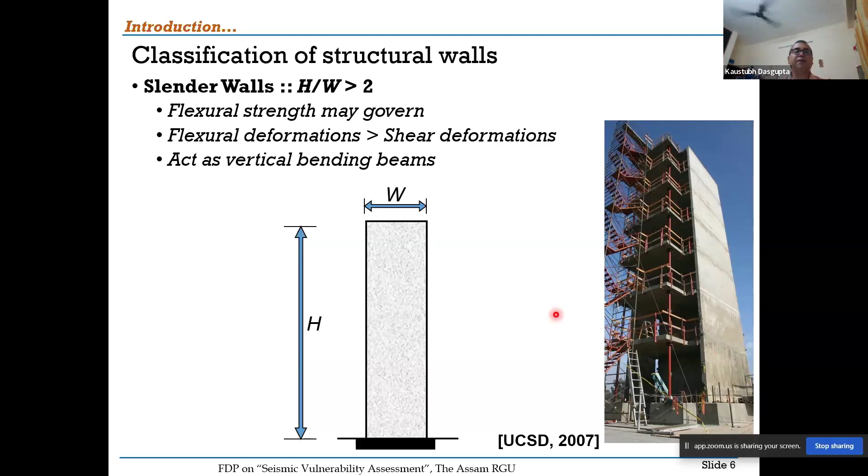Then you have the other category where H by W is less than 1. That is called a squat wall. In a squat wall, if you have any lateral horizontal force, since the height is small, it will not bend. How will it deform? It will deform as if it is being sheared.

So it will deform like a shear action. If you again turn it clockwise by 90 degrees, you get a cantilever beam which is very deep. When you have a deep cantilever beam and apply the load at the tip, does it bend? It doesn't—it simply shears, having a shear deformation. Similarly, a squat wall will also have shear deformation, with very little flexural deformation. So they act as vertical shear beams, and here shear strength becomes the criteria.

Now what happens for the range of H by W between less than 1 and more than 2? That we call intermediate walls—look at the IS 13920 specification for intermediate walls. Here you have a mixed effect, flexure and shear together, so it's difficult to figure out the behavior. These two extreme ends are easier.

For example, you have a lot of such squat walls used as bridge piers. This was taken from a bridge in the region of Sikkim. As you can see, the height is small and the length is large. So although we don't call them walls, they are squat piers.

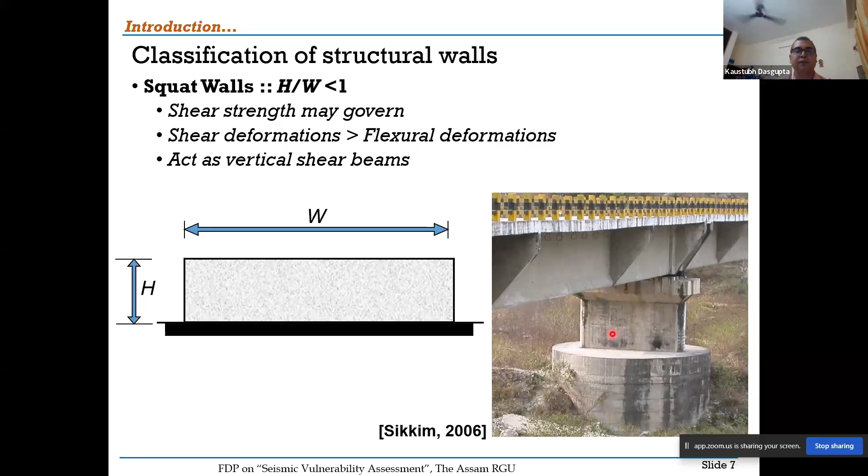The same squat wall is used, but these are squat piers. When you have the shaking, you have horizontal force and they act in that form. Let us see a few failures of these structural walls from past earthquakes.

If you have a weak layer during construction, during earthquake shaking you can have cracks develop that lead to horizontal cracks at the construction joint. So there can be a possibility of small sliding, as you can see here. This happened in the Chile earthquake in 1985.

Sometimes if the underlying soil layer is a bit weak, you can have this kind of rocking action. Initially there may be cracks, but then the foundation or footing will get tilted, and during back and forth action this foundation keeps on rotating. That is called rocking. We talked about rocking stiffness during the lumped spring model in the previous presentation.

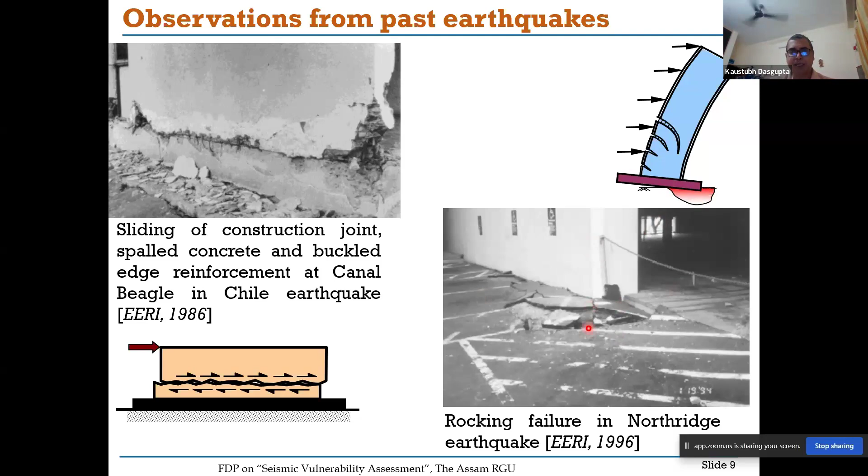So this is one rocking failure. Above the ground you may hardly see any damage, but you will see the damage below, because the damage is primarily here. There was some paved area, and the paving also got damaged because the underlying soil underwent some changes.

In buckling, what happens? You apply compression, and if the member is slender it suddenly deforms laterally. First it undergoes axial compression, then suddenly it deforms - that is buckling. This is not exactly buckling, but since it was under compression and had less thickness, and since cracks were already formed, a similar kind of instability developed in the out of plane direction.

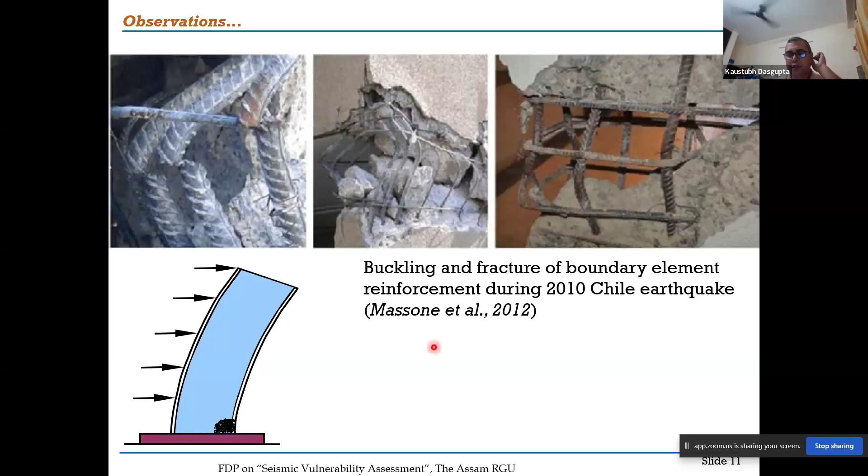There's nothing left to hold or restrain the bars back - earlier there was cover concrete and core concrete surrounding it, but now with large compression the bars can buckle. Sometimes if the bar quality is poor, they can fracture, which is quite unusual - here it has fractured. Then of course you have bar buckling as well as shear failure, you can see the shear cracks like that. These are very interesting failures.

When you have shear walls around the lift or elevator, you can have diagonal cracks. This was observed in a number of buildings during the 2001 Bhuj earthquake. In the bottom part you have the shear effect - even if the wall is slender, the bottom part will have the boundary region effect, known as the D region, disturbed region, and there you can have shear cracks.

In shear cracking, what happens? Whenever you have shear, you have diagonal tension and diagonal compression. The concrete will first crack, forming diagonal shear cracks, then it can get crushed when the loading gets reversed, and so on.

Now here is very interesting - here you have the wall, and here you had the slab. Generally, when we talk about earthquake resistant design, we don't talk about earthquake resistant design of slabs, because beams and columns are the elements supposed to undergo damage during seismic action. So we talk about ductile detailing and earthquake resistant design for those elements; slabs are generally kept aside, they're not supposed to get damaged. Here, the entire slab wall junction got damaged.

During earthquake shaking, maybe the damage started in the wall, but then it propagated into the slab. That was the interesting part - it gave deep insight that even slabs may not remain undamaged. Since this happened, many times we ignore slab damage.

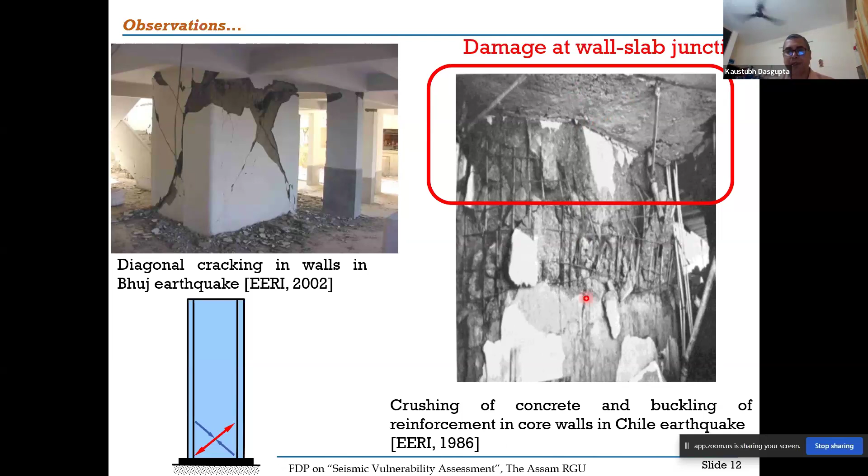This was also observed in the 1985 Chile earthquake, which was an eye opener. The damage at wall-slab junction, since it was observed in 1985, became an interesting topic. In different failures of shear walls, these two Chile earthquakes carry a lot of significance.

Chile is a country with quite improved provisions for design of shear walls. Since Chile is an earthquake-prone country on the Pacific coast, on the lower side of South America, earthquakes keep on coming, small and large magnitude.

These two earthquakes were of particular significance because many high-rise buildings which had shear walls designed as per established provisions, with perfect ductile detailing, many of them underwent different kinds of failure.

Just like the Kobe earthquake brought a lot of change in the design of viaducts, flyovers, and bridges as per Japanese codes, these two earthquakes made Chile earthquake engineers think and formulate new provisions for shear walls in buildings. So that's why these two earthquakes are very important.

In the 1985 earthquake, there were other observations also at slab-wall connections. The concern is that stresses developed at the wall-slab junction led to that damage, so the presence of slab is perhaps influencing the performance of the wall. When we talk about slender wall or squat wall, there was no slab.

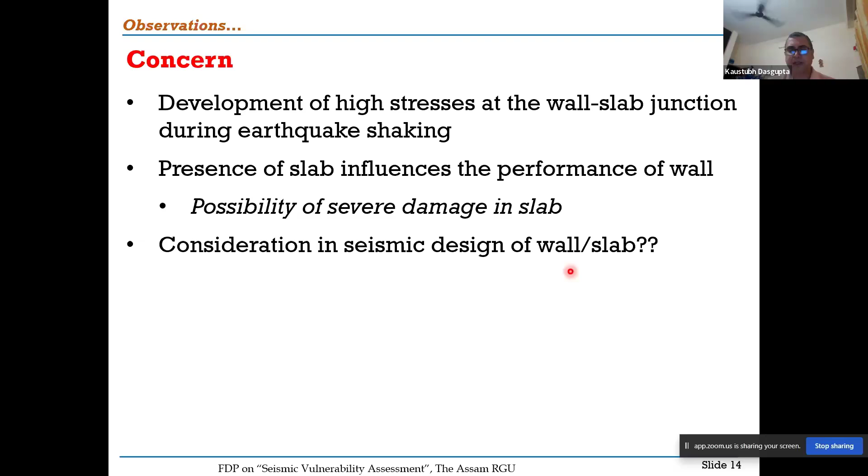So in the seismic design of wall-slab junction, do we need to change our philosophy? Do we need to rethink or relook at it?

When we do the earthquake resistant design of any building or its components, we carry out two levels of design. One is the limit state method, the conventional one. Generally, for normal residential buildings, we only design against limit state of collapse, as per IS 456/2000. We rarely consider limit state of serviceability, but for certain buildings or structures we have to consider it.

Once you arrive at the dimensions, rebars, and other things as per limit state design, there we do linear elastic analysis with design load combinations. Then we have to do the second level, that is the capacity design, based on the possibility of the actual behavior. Because when we do the limit state method, we consider load factors and partial safety factors for materials.

Both are idealized cases - we are reducing the strength and enhancing the load on some probabilistic basis, then doing the design. When an earthquake comes and strikes the entire structure, the material in the building doesn't know about partial safety factor. Whatever way it has been constructed and cast, the material will behave like that.

This actual behavior of material can lead to higher forces than we estimate at the design level, at the limit state design level - that is the concern. It's very well illustrated in IS 13920/2016. So that is capacity-based design.

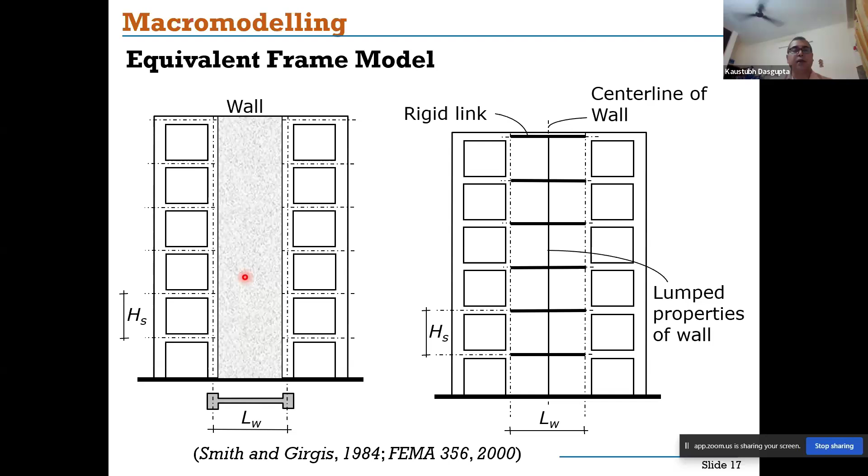And then you have finite element modeling. As we had seen for the soil domain, you discretize into a number of elements. If you want to model a wall along with the floor slab, you have to use solid elements, meaning 8-noded elements, with 4 nodes on one face and 4 nodes on the opposite face, having only translational degrees of freedom. You have to use that element for modeling them.

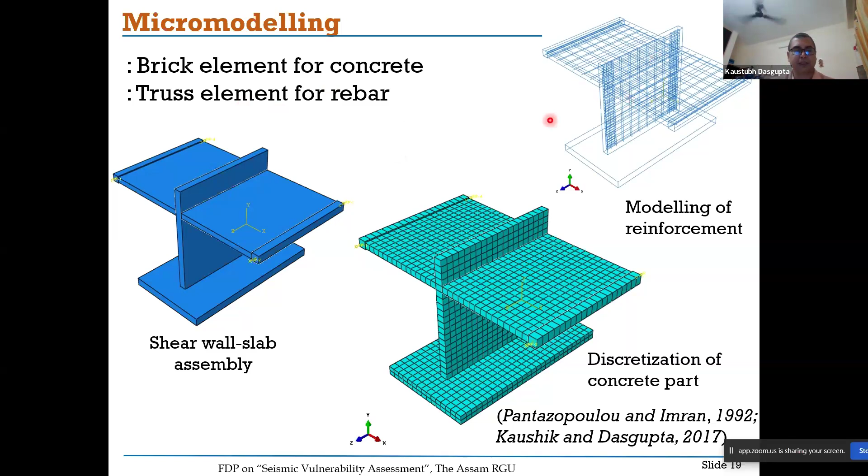Let us look at the methodology. When you use the 8-noded solid element and want to use the entire assembly for nonlinear analysis where you expect to get damage, you need to use a model known as CDP model, called concrete damage plasticity model. So that is one model, with this kind of element, the 8-noded solid element.

If you are familiar with the finite element method and how the numerical process works, there are certain shape functions which you have to define, and these shape functions have different polynomial forms, higher order or lower order. Sometimes to reduce computational effort, we look at the integration at a lower level. That's how the term reduced integration comes into picture. So in any element of Abaqus, if you have a capital R at the end, that signifies this element uses reduced integration, with less computation in the polynomial form.

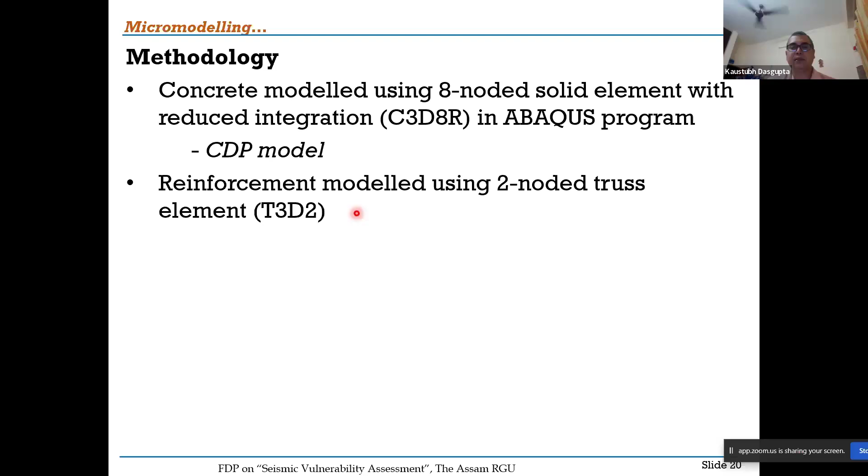Then you have the 2-noded truss element as reinforcement, which you embed as I mentioned. The work I'm discussing here did not have any interaction with the soil. It was not carried out as nonlinear dynamic analysis like applying ground motion. It was done by nonlinear static analysis.

What is nonlinear static analysis? Also known as pushover analysis. You just sway or push the structure monotonically in one direction and then see, with large lateral displacement, how the damages and those things come up. That's how it's done.

Since soil was not considered, all degrees of freedom were restrained at the base, as I had mentioned earlier. And since we are looking at the in-plane behavior, the out-of-plane behavior of the wall was also restrained.

Sometimes if you have less thickness, say 150, the code allows providing a single layer of vertical bars and a single layer of horizontal bars. But whenever you have wall thickness of 200 or more, you have to mandatorily provide 2 layers of bars.

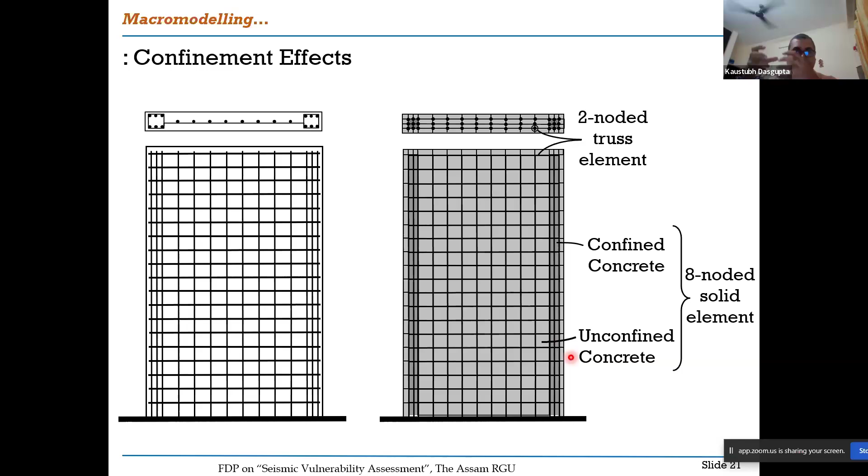Confined concrete has higher strength than the cover concrete. What we use in IS 456:2000, the design stress-strain curve for flexural compression at 0.45 FCK, is more close to unconfined concrete with no confining effect. But in reality, when you look at actual behavior, confining action is bound to come depending on the spacing of your ties at the end regions.

So as I mentioned, the concrete damage plasticity model has to be considered for concrete. This takes care of degradation of strength and stiffness. When you look at the behavior of concrete, whether unconfined or confined, it first picks up strength, then reaches a peak value, then drops.

This part is the ascending part where it is picking up strength, and this part is the degrading part. The strength degradation reflects or captures the damage. Once it starts degrading, that means the damage has started. So whether it's confined or unconfined, the damage will be there.

So this degradation of strength and slope, the stiffness also degrades. When the concrete becomes weaker, it becomes less stiff. So that is captured nicely by the CDP model.

And then when you talk about reinforcing bar, you have the normal reinforcing bar stress strain curve going for the design part like 0.87 FY, what we use as per IS 456 2000. But then we are looking at the actual behavior, right? So in actual behavior, we need to consider the stress strain curve, what you get during the uniaxial tensile test in any UTM machine.

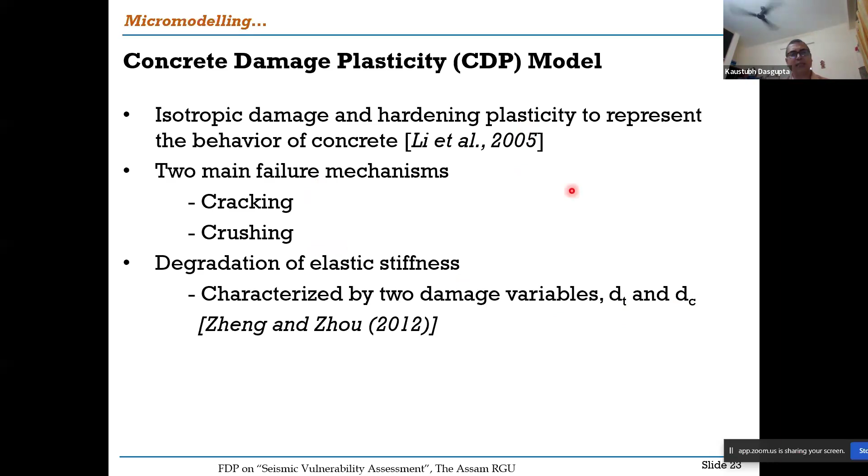This is a well-established model, nothing new about it. There are different parameters starting from modulus of elasticity. You have these particular parameters, the last five parameters, starting from dilation angle, eccentricity, viscosity parameter, shape factor, stress ratio. These all are part of the concrete damage plasticity model, the CDP model.

So when we try to validate, first we try to establish what are the CDP parameter values which are part of this calibration. Because you have an experimental study as a reference, you try to simulate that numerically. When you try to simulate numerically, you try to take care of the failures, you try to take care of the overall behavior, and to obtain that, you need to play around with these parameters.

So whenever you do any numerical modeling of any component, any structure, any analysis, first you should check whether the methodology of modeling, whether it's the type of element, whether it's the material property, boundary condition, all whatever you are going to consider should give you as close to the realistic behavior as possible.

So if you have an experimental result of a certain specimen with all the input details, you should try to model that specimen first in your program, whatever you have chosen, and then try to get the closest result possible to the experimental one. Many a time it becomes difficult because the reference paper or the study which you are considering may not have all the input details, and then you have to assume.

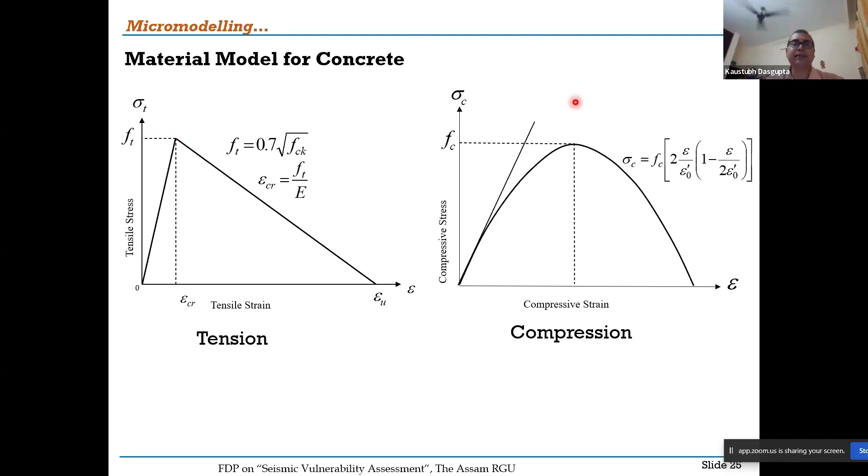But anyway, for numerical simulation completeness, you have to give the curve. So we provide this curve in any numerical model.

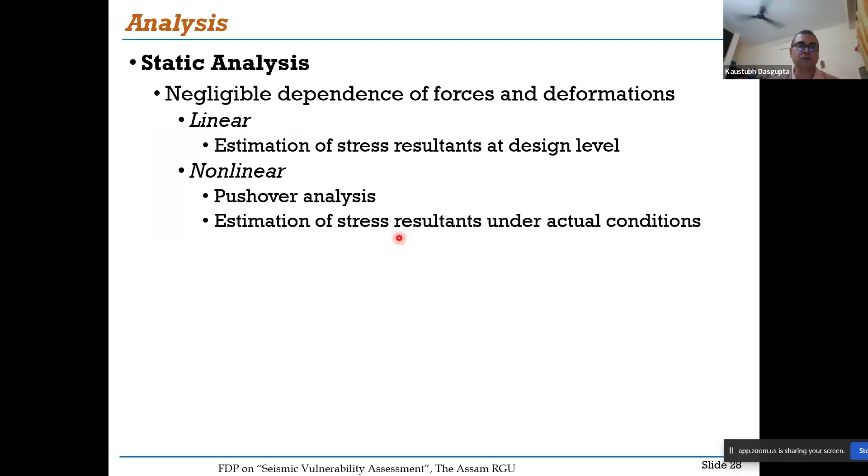So how was the analysis done? Again, depending on the requirement, you have two categories of analysis. When you want the design level response, you do linear elastic analysis, as I mentioned. When you want to estimate the forces and moments of the stress resultant under actual condition, seismic evaluation, you have to do nonlinear static analysis, which is pushover analysis. Then to simulate the dynamic behavior under actual condition, we go for dynamic analysis, where you need the damping to be modeled properly. In the present study, dynamic analysis was not carried out, only nonlinear static analysis was done.

So primarily 6 models were used, because the study was done for the first time with this multi-story wall with slabs at different levels. So we thought different cases have to be considered. Two different heights were considered: one was 10-story and one was 5-story. Now, a 10-story wall slab means more elements, more reinforcing bars, and when considering damage, the computational effort is more. So the 10-story wall was considered with only concrete, just for the sake of study, and concrete damage plasticity was assigned for the entire thing.

However, no reinforcement was considered there. When the 5-story wall was considered, with fewer elements, we could do different permutations with reinforcement embedded, without reinforcement embedded, and so on. So these were the different cases. And then we have a shear wall standalone model without any slab, just to see how the comparison comes up. So these were the different models.

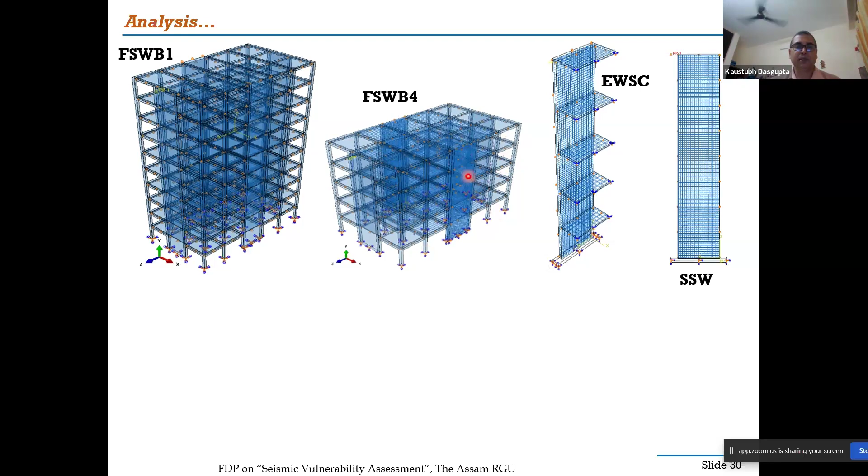When we model the slab, we can consider small sized elements over the entire extent of the floor. Now, the more you make the element smaller in size, the number increases. Once the number increases and the damage starts, your program becomes slower and slower when running. Many times it doesn't converge, because nonlinear analysis involves a lot of iterations for which convergence is necessary. So, in that respect, you may not be able to afford small size elements throughout the extent of your floor.

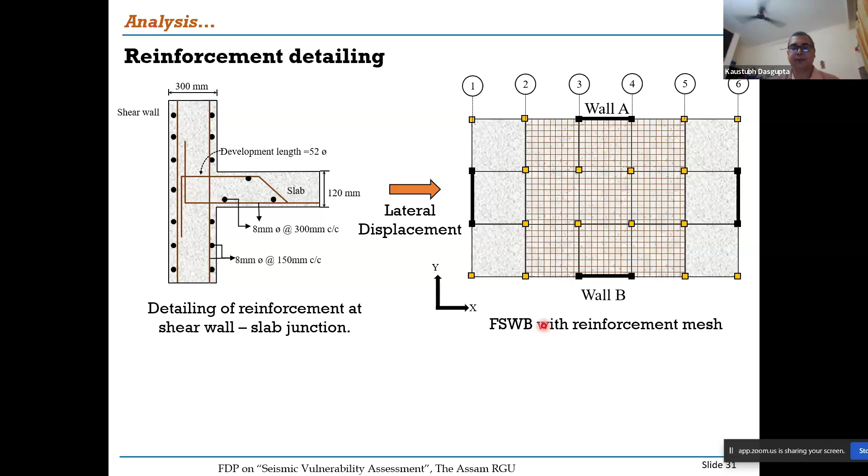Also, the rebars were considered in this part because when you push in this direction, these two walls get active, wall A and wall B. So in this vicinity we expect damage, as we had seen in that Chile earthquake figure. Fine, let us look at the results quickly.

First, for any finite element study, we have to carry out a mesh sensitivity study. What size of element are you going to use for your detailed analysis? You need to consider a few mesh sizes, see how the result varies, and if you're not getting appreciable variation, you can use the larger size, since a larger mesh gives less computation time. You cannot spend hours, days, and weeks on analysis.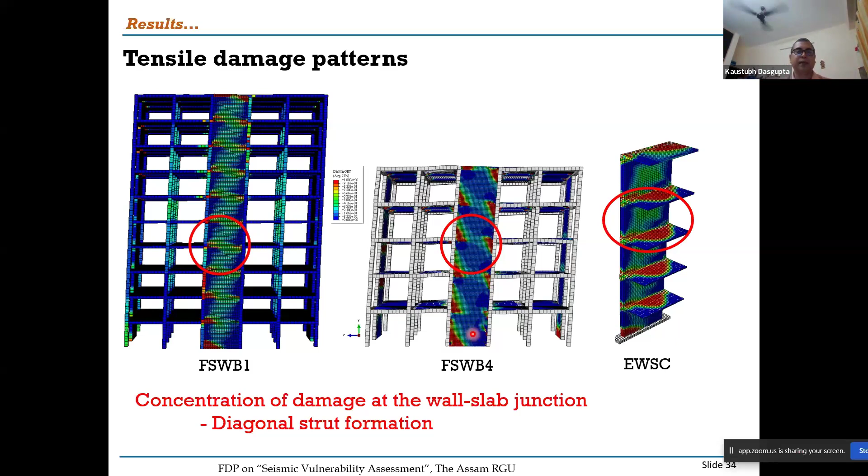So similar observation is being seen here - this is the deviation. If you had a wall like this, you expect bending behavior here. Near the junction is the disturbed region, where you expect shear behavior. But up to here, you expect a vertical cantilever.

But when you look at the wall, we just extracted that part of the wall. At the slab levels, you are getting the damages. So there's a distinct difference between what you expect in the presence of a floor slab versus the isolated wall. This was a major finding.

Now let's look at the tensile damage pattern in the slab. For the two cases, FSWB1 and FSWB2, depending on the parameters, the spread of damage is less here, and in this case the damage has spread more. So slabs are getting damaged. What we observed in the 1985 Chile earthquake, that heavy damage at the slab-wall junction, is exactly getting reflected here - you have a portion of the slab getting damaged connected to the walls.

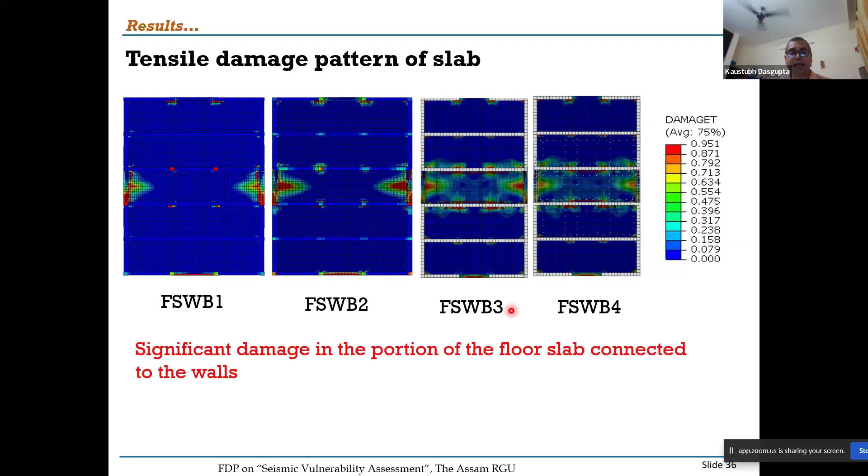When you look at the plastic strain, there are different ways of quantifying damage in Abaqus - plastic strain in the equivalent form is one way. Depending on the region of your wall, the plastic strains are larger, and from the tension face of the wall you have more plastic strain here. At first floor level, we have tried to figure this out. The strains in the rebars are also getting changed - that is what we get.

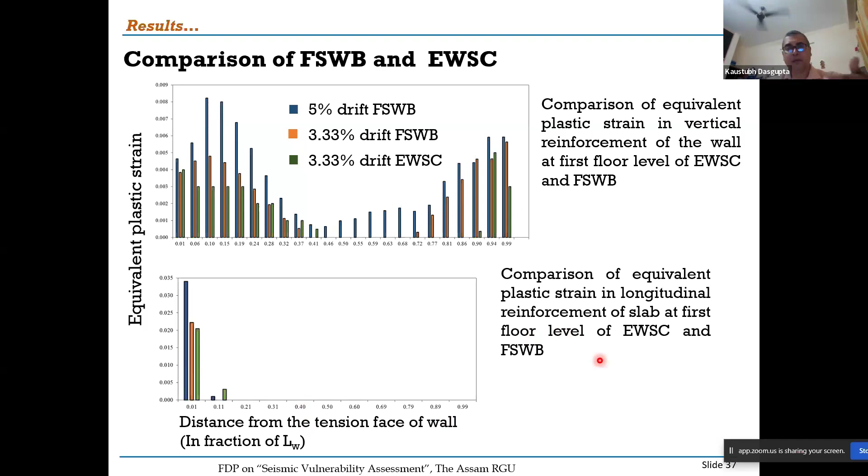At the maximum drift level, you can see the comparison - this is for the cantilever wall, and this is for the wall with slabs. Same thing, compressive damage and tensile damage - you can see the very clear difference. If you do not consider the slab, the behavior changes. Again, for the equivalent plastic strain, it changes for the different cases.

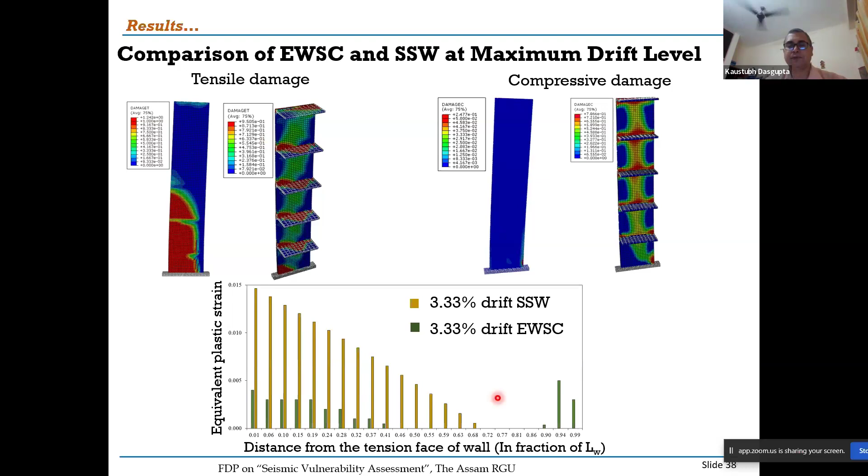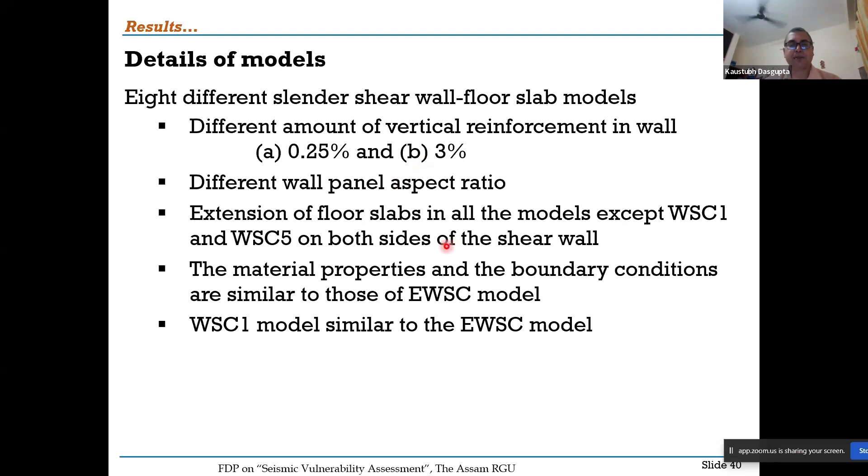Then a parametric study was done to get more detailed insight. For that, only the wall-slab assembly was considered, not the entire building, because once we do a parametric study, the building analysis will take more time. So we had different models with varying amount of reinforcement as one parameter, wall panel aspect ratio - story height by story length for the panel - extension of floor slabs, and material properties. So different parameters were varied.

These were the summary of the different reinforcement details. What is the extension of slab? Let me show you here. In this one, the slab ends at the edge of the wall. Now here also it happens - what's happening here is we're extending the slab slightly beyond the edge of the wall. The intention is that the damage can spread, and we want to allow the damage to spread as much as possible, because our intention is to see how much the slab is getting damaged. That's why we extended the slab on either side of the wall by a certain extent - that's how this extension of the slab came into action.

When you play around with these parameters, you can see the variation in the propagation of damage. At different levels of drift - 0.5% was very early when the damage just started, this is the moderate level damage, and this is the final drift. So what is the variation here?

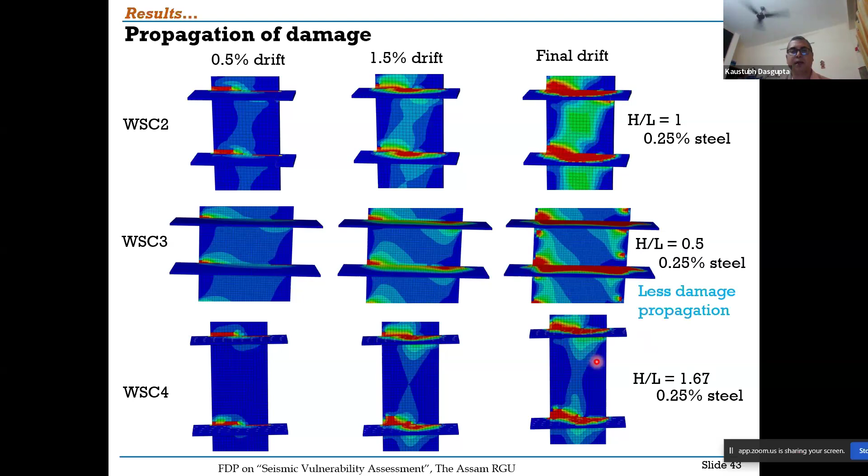Then different extents of tensile damage along the length of shear wall were plotted. I won't go into all the details as that will take time, but these are the primary findings. When you look at the tensile damage reaching the maximum value, this is the damage level defined by the damage parameter. At the beginning of the CDP model, I mentioned the damage parameter signifying tensile and compressive damage. This shows how the maximum damage parameter is reached, how early or how delayed, which defines the propagation of damage. If there's early propagation at low drift level, the damage parameter reaches value 1 very sharply. When it propagates slowly, it reaches maximum damage in a delayed way. So these are the ways to interpret the results.

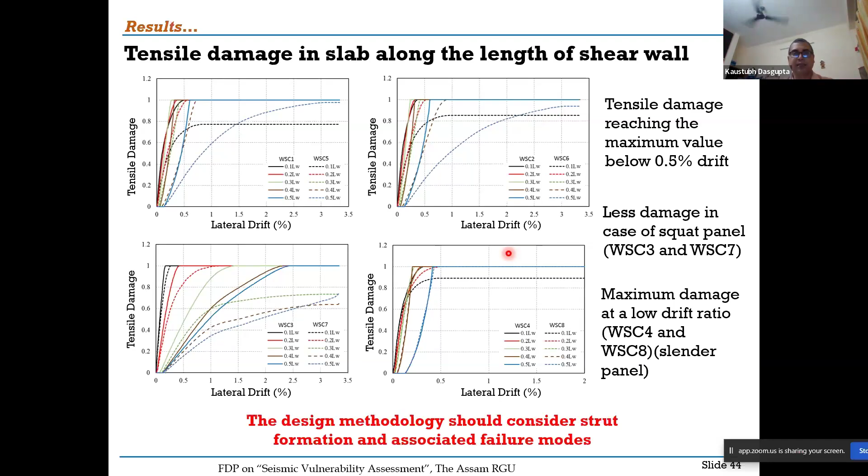So the final outcome is that in our seismic design, this panel-wise behavior, the floor levels are cutting across the entire wall into different panels, so panel-wise behavior is never considered, along with the associated failure modes. Probably the time has come to consider that.

This again shows the difference in tensile damage level for higher versus less reinforcement. If you have less reinforcement, you expect damages to start early, reflected in this sharp rise reaching maximum tensile damage. For the 3%, it reaches slowly and to a lesser extent. So increasing the minimum percentage of steel in the shear wall may probably lead to lesser damage in the floor slab because the propagation of damage is slower.

So to summarize, you have the formation of a diagonal strut in the wall panel between the floor slabs. We can see cracks on the tension face and crushing in the compression face, both have formed. Damage occurs at a lower drift level depending on the aspect ratio, with higher aspect ratio wall panels and lower vertical reinforcement ratio leading to more damage.

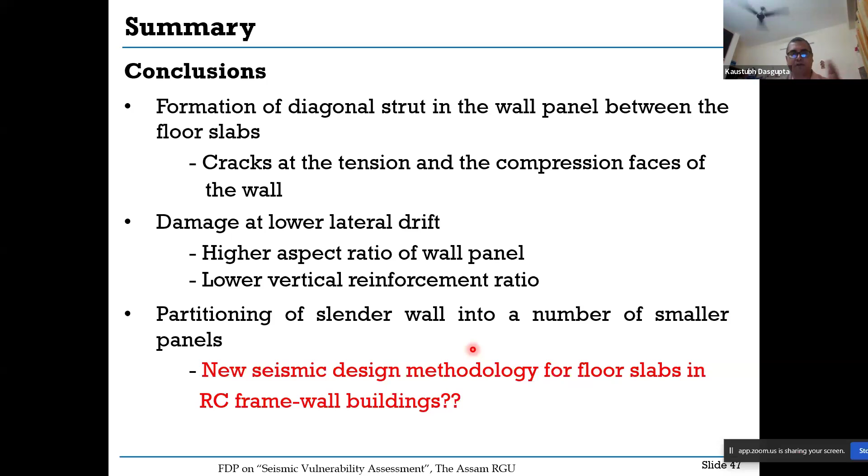And all this, whatever I have shown you, is possibly the beginning of a new seismic design methodology for floor slabs. We need to study more, do more experiments to find out really how the slab is playing the role. We have observed certain damages through the actual failure of the building, the junction, as well as the numerical analysis. But unless we do more experiments, we won't get that much practical insight. A lot of possibilities exist in this direction.

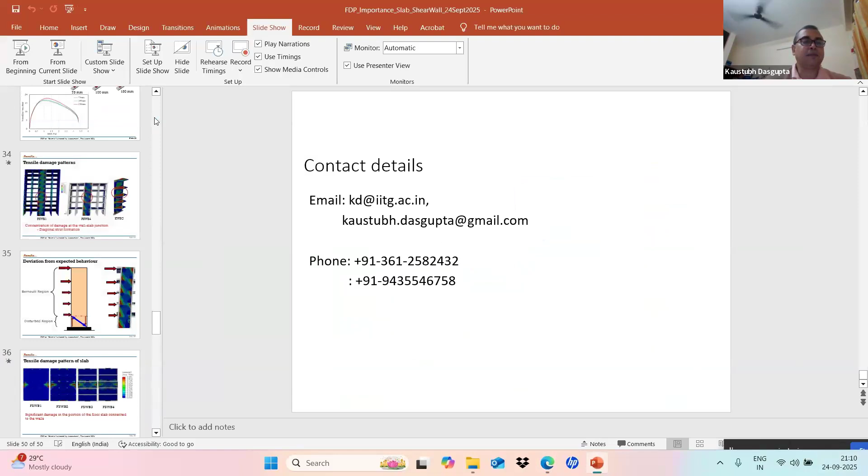So now if you want to model this in ETABS, instead of these end columns, you will have an entirely rectangular section. You assign this equivalent frame element at the central location of the wall, assign a rectangular section, because you don't have these end columns. So it will be an entirely rectangular section for this entire height, the cross section will be rectangular, and then you connect with these beams.

That is not a problem, because here you will have this normal beam connected with a rigid link, again the rigid link connected with the normal beam on this side. So any shape of the wall, whether you have the end columns or not, even if it is rectangular, the property needs to be assigned to this equivalent frame element accordingly, and the rest remains same. You connect the beams with these rigid links at different levels.

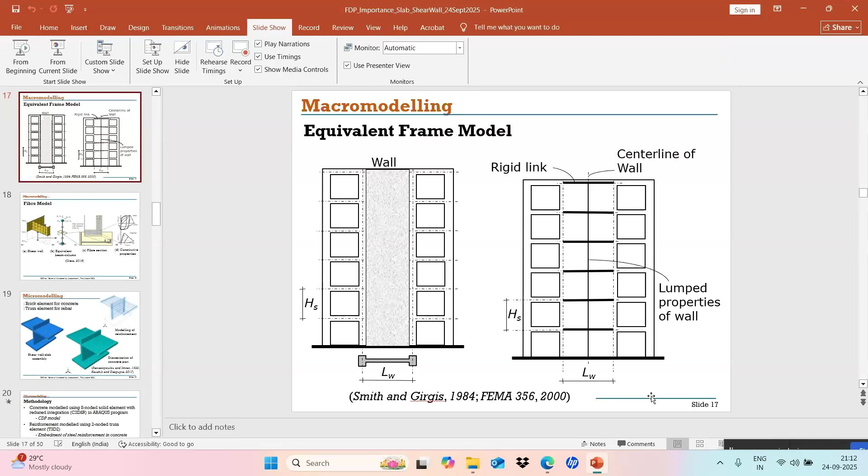Does it answer your question? Thank you, sir. I have another query. Sir, the PM interaction curve, is it same as for a column? PM interaction curve for wall is slightly different.

If you look at the annexure of IS 13920:2016, which provides the design provisions for earthquake resistant shear walls or special walls, there is a closed form expression for the bending moment for a rectangular wall section. One expression for the under-reinforced case, another for the over-reinforced case. There also you have, similar to the column, a parameter P by FCK BD, and another parameter lambda, and moment is expressed in terms of M by FCK BD square. So instead of using curves, IS 13920 does not prescribe those curves.

Rather, for any rectangular slender wall section - that is only for slender walls, those equations are valid. So for any slender wall section, depending on reinforcement percentage and material properties, the equations are prescribed. In that way, the interaction will be slightly different. You change lambda, you change P, you get different M, and if you plot, you will get an interaction curve, but it will be slightly different.

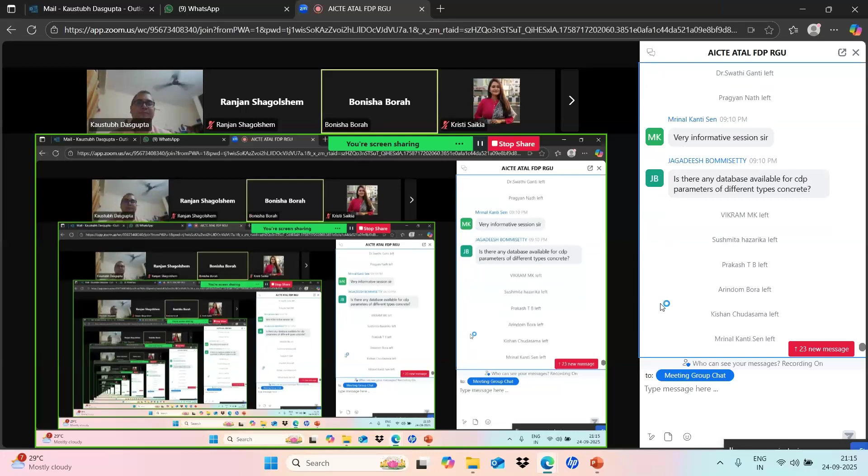So I have one question here. Jagadeesh Bommisetty asks: Is there any database available for CDP parameters for different types of concrete?

CDP parameters will change not only for different types of concrete, but for different components. Like if you do an analysis for the beam, a separate standalone beam model under vertical load, lateral load, whatever, the set of CDP parameters will change when you try to match your Abaqus simulation results with that of experiment. For the same beam, if you change the grade of concrete and do the experiment, again the CDP parameters will change. If you take a column and change the grade of concrete, you get different sets of CDP parameters. So CDP parameters vary or get established for different components, different grades of concrete, even different rebar quantities, because the concrete behavior is also related to the steel reinforcing bar influence.

So it is difficult to get a database. But for different types of concrete, I'm not sure. If you want results for a particular beam, you can look for and get the database. If you want results for a column, you may get certain database, but that database also may not be extensively covering all grades of concrete, all kinds of parameters, so those will be difficult. For walls with low aspect ratio, squat walls, I think there was a study by Whittaker and some other people, where different experimental studies were compiled and their CDP parameters mentioned. But as such, a separate database for different types of concrete, I don't think is available.